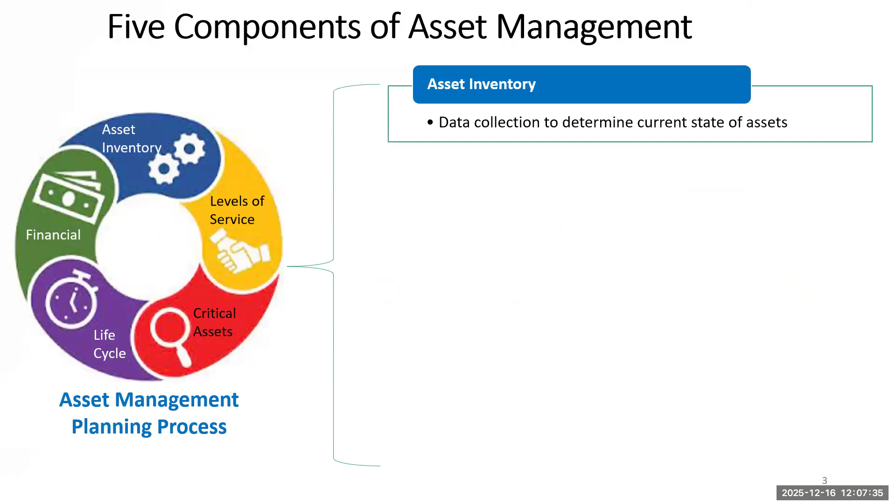We looked at the asset inventory, which is a framework to collect data. We talked about asset criticality as a way to analyze risk and prioritize asset actions.

We explored the asset life cycle, and we did an example where we compared an asset where we did all of the required maintenance that would be expected over an asset's life cycle and compared that to not doing the maintenance. We found out that it actually increased the annualized cost.

We talked about levels of service, and we had an example where we looked at a lift station where it was expected to deliver a certain flow and PSI, and we can use that to compare the performance of the asset over time. We also briefly discussed long-term financial planning, which we're planning to be able to cover the cost of future projects.

We talked about criticality: higher criticality assets require some type of immediate work, whether it be rehabilitating, repairing, or replacing, whereas low criticality assets might only require routine maintenance. Those assets in between, like something with a high probability of failure but a low consequence, or a high consequence but low probability, might just require aggressive monitoring or inspection.

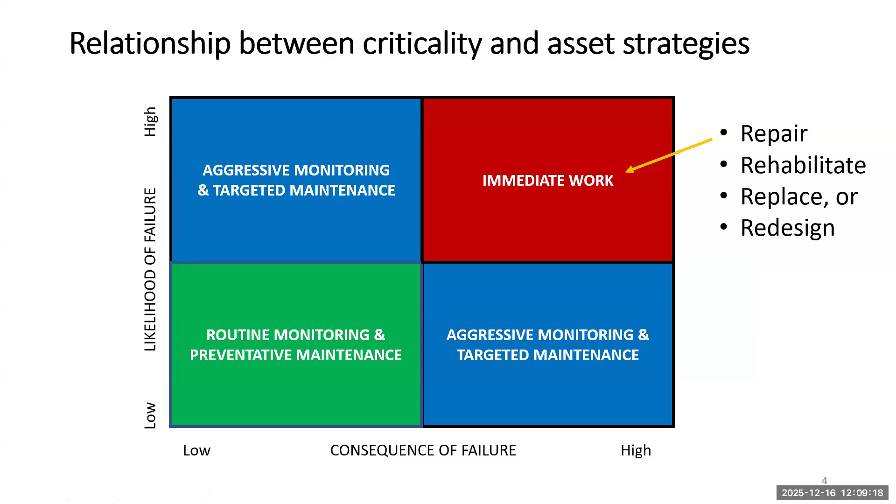We also looked at asset performance over time. We looked at the decay curve, for example, and noticed that over an asset's performance over time, we get to a point where it has an accelerated rate of decrease in performance, and we want to be able to catch failure modes before they result in outages or further damage.

We're going to get into this a little bit more today as we discuss lift stations. We've found that certain techniques like ultrasound or vibration analysis can help us detect certain types of failures and replace, for example, a small bearing, or adjust the amperage imbalance so we can prevent greater amounts of damage over time.

So we talked about this decay curve and briefly touched on some of the inspection techniques that we'll get into more today. Then near the end of yesterday's training, we talked about basically 4 different categories of assessing the condition of collection mains.

We looked at inflow and infiltration. We spent quite a bit of time on that, differentiating between what is inflow and infiltration, and how to interpret that. We used the concept of gallons per day per inch diameter mile.

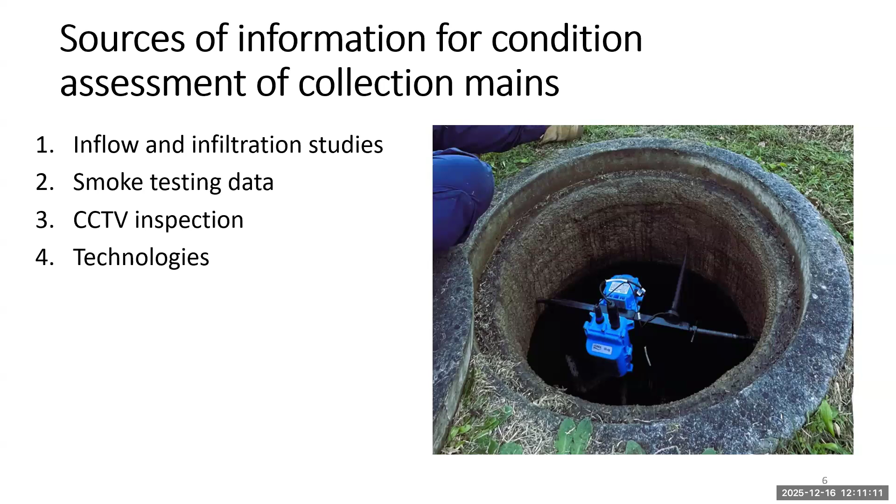We talked about smoke testing, CCTV inspection, and interpreting and coding those results. We talked about a couple different technologies: electrical scanning and the sewer line rapid assessment tool. We used that information to prioritize areas of our collection system that we're going to focus on repairing, inspecting, analyzing, or rehabbing. So that kind of sets the stage for today.

As Ingrid said, we want you to be able to interact with us, even though we're separated by this Zoom media—you're on one side of the screen, I'm on the other, we can't see each other. But if you can engage in the chat, if an idea comes up, share it. If a question comes up, share it in the chat, and it'll be recorded so we can bring it up during a Q&A session.

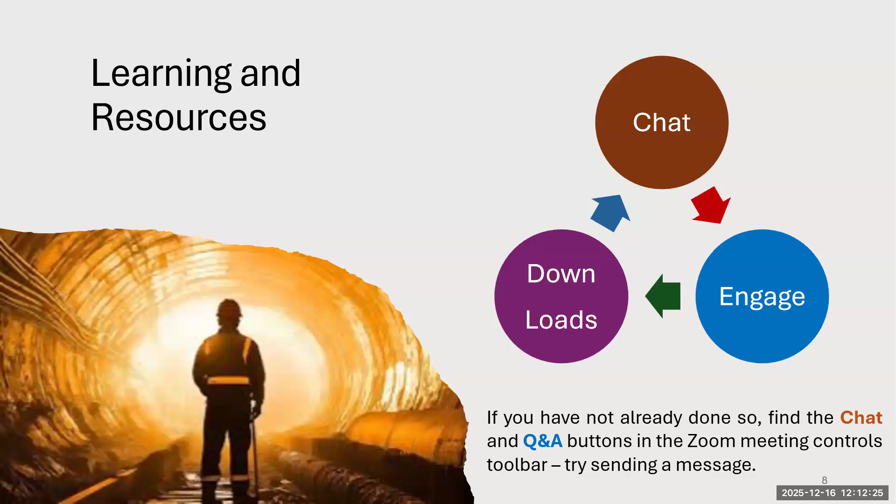Remember the downloads. There's a resource page with documents you'll want in your library: actual manuals, studies, and blogs—quite a few resources you can engage with. By sharing ideas in the chat, you help other learners too, since there might be questions on your mind that other learners share. So be sure to take advantage of that.

Today, we're going to be looking at the following topics. We're going to start out by thinking of some ways that we can refine the criticality of certain assets.

Some ideas that will help us decide which collection main, for example, is the highest priority. Then we're going to look at some repair and replacement options for collection mains, and spend some time on the condition assessment of lift stations. As we end today, we'll look at maintenance strategies and how to analyze them, and finally end up with some financial and strategic planning concepts.

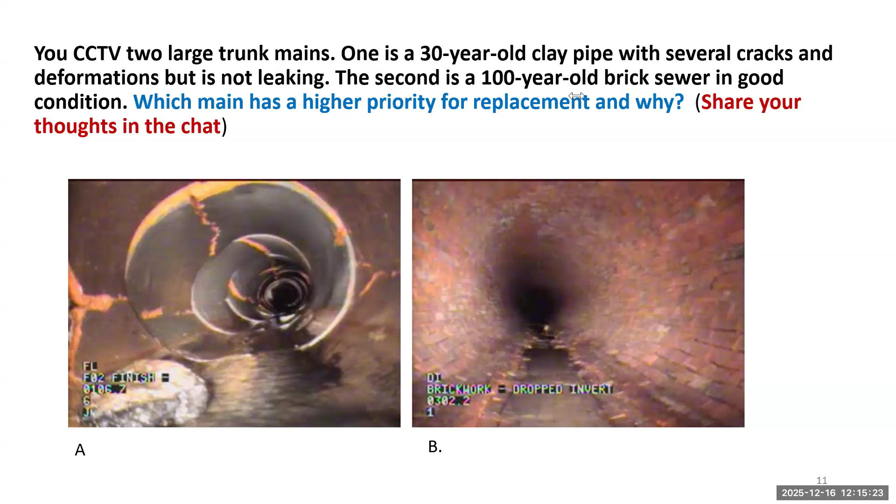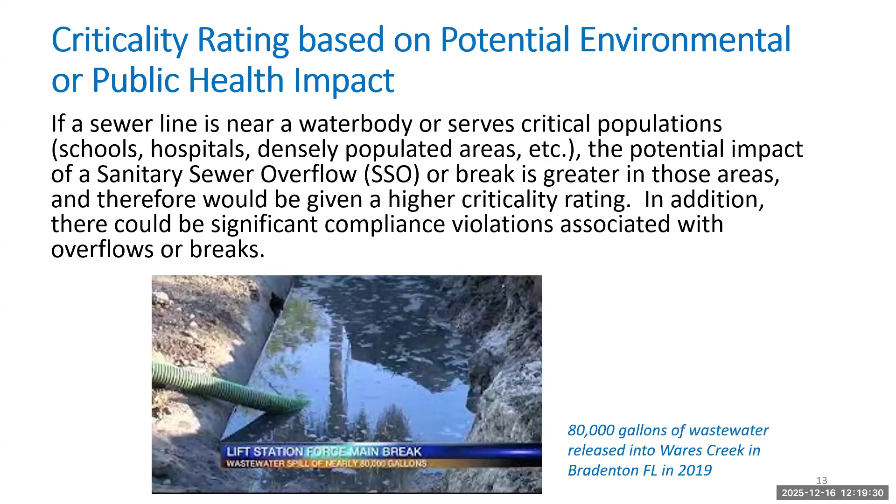But if a wastewater main is difficult to get to and you have an emergency breakout, that's a higher criticality, and you'd want to catch that before it happens. These types of situations aren't only difficult, they're unsafe for operators, and can cause longer disruptions and result in much higher cost.

I've heard some figures, and I've tried to track them down to find studies to validate these, but as a general rule of thumb, emergency repairs can cost as much as 7 times higher than a planned repair. It kind of makes sense, because you're rushing around to get materials and you're not able to take advantage of cost savings—you just need what you need when you need it.

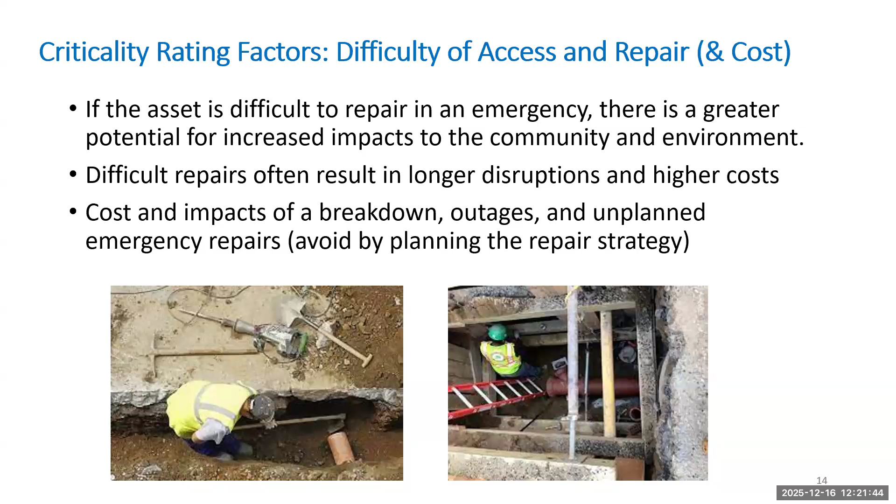For a repair, you might need some kind of dewatering pump, traffic barriers, safety equipment, and you need all the repair materials on hand. So the economic impact for sure is greater, and a disruption such as an emergency with an unplanned break can result in some serious time problems as well.

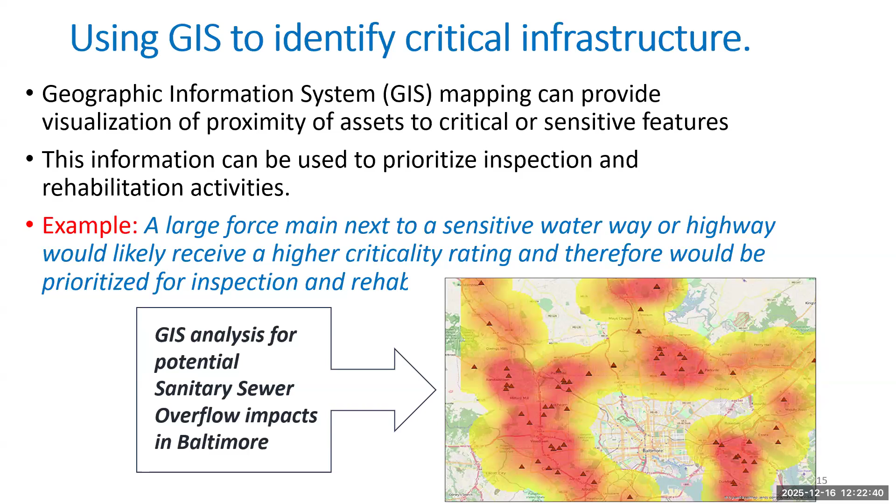I'll give you an example here of criticality—we looked at this yesterday. The criticality factors we just looked at would mostly affect the consequence of failure. We have two examples: a collection main that's 1,000 foot, 24-inch diameter clay sewer, and a 100-year-old 18-inch concrete main.

For the clay main, the probability of failure is 2—it's not likely to fail anytime soon. The consequence, however, is 4—it would cause a major impact, probably partly because we analyzed how it might affect environmental conditions or public health, transportation routes, and population centers. So it would have a 4.

And this number 2 here, we have a 2,000 foot, 100-year-old main. It's still in relatively good condition for its age—probability of failure is a 3—but it could have a catastrophic consequence, most likely with some extra weighting due to some of those factors we looked at.

If we compare the two—and I'm sorry, I have lift stations there too—one lift station has 20 years remaining, and the other only has 5 years remaining. If we take the criticality for each of these: collection main number 1 is 2 times 4, which gives us an 8. Collection main 2 has a probability of 3 and a consequence of 5, giving us a 15.

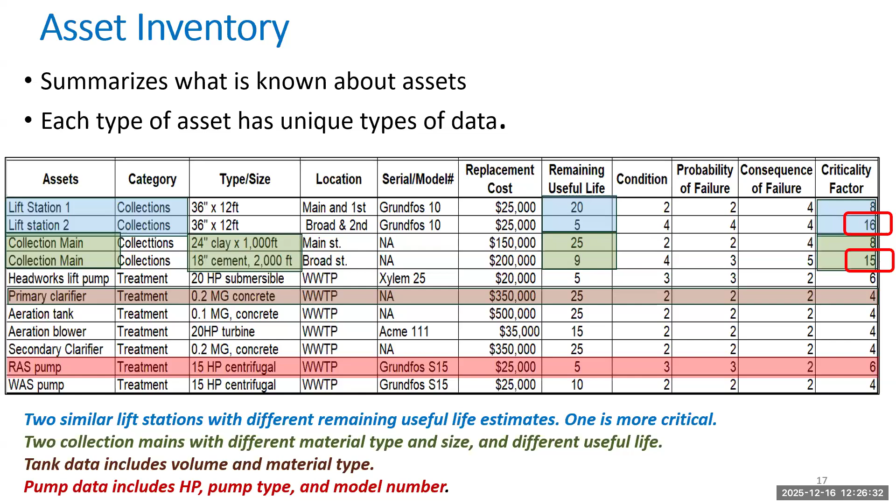If we look at an asset inventory, some of these things are reflected here. Here's our lift station number 2, you see it has a 16, and our collection main number 2 has a 15. I've circled those under the criticality factor, so we can make a financial plan to address those. The higher criticality ones would go into our capital improvement plan. If we have a 5-year or 10-year capital improvement plan, those would be represented.

Now we want to talk a little bit about ways that we can rehabilitate collection mains. There are three general ways I want to talk about. The first is slip lining.

Cured in place pipe is a way of inserting a lining into an existing pipe. This seems to be the preferred method for a lot of pipe rehabilitation. It does not affect the interior diameter as much as slip lining. It's essentially just renewing your pipe, and it has a 50-year life expectancy. You pull in a liner that is impregnated with a curing chemical that will cure into a hard pipe. The disadvantages of cured in place pipe, CIPP, is if you have a situation that doesn't allow the liner to be pulled in effectively, like a collapsed pipe.

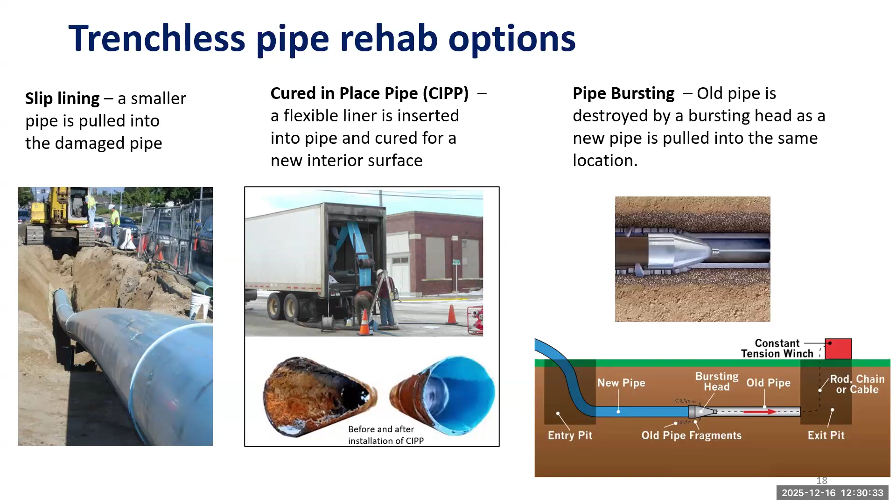So we'll look a little bit more at cured in place pipe. You have a pipe that's damaged, it has cracks, but the pathway is not obstructed. You would clean it and evaluate the pipe to make sure that it fits into the scope of what CIPP can be used for.

Then there would possibly be the need to bypass pump around the repair site. In some cases, and Daryl has had experience with this, your collection system may have enough storage where you can just block off that section that's going to be repaired and allow the upstream piping to basically be like a storage tank for the wastewater as the repair is being conducted. But if not, you would have to have some bypass pumping around the repair site.

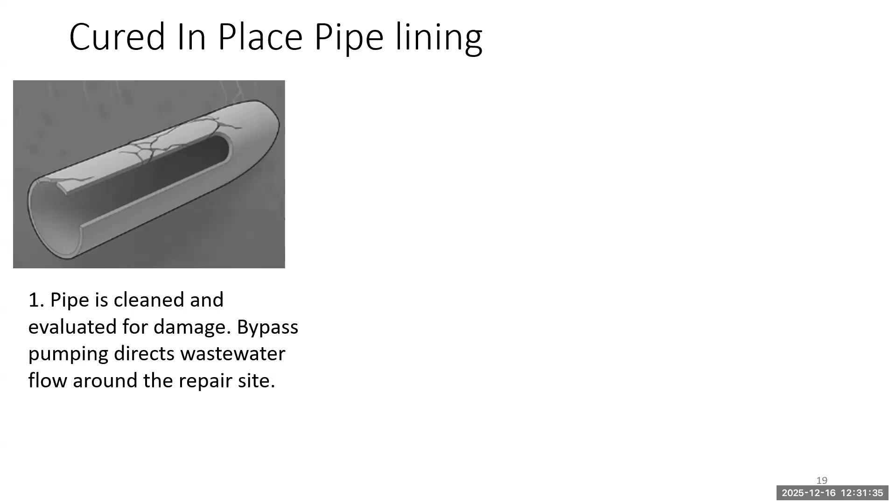The liner is pulled in and inflated, injected with resin. It's inserted into the pipe and then inflated in some way so that it expands out to the pipe diameter, and then it's cured.

There are different ways that people use to cure it. It can be with heated steam, but there are other methods that can be used. It could even just naturally air dry if you have the right conditions.

After this pipe is inserted, it's blocking off all of the interconnections, such as service connections coming from homes. So a robotic tool is used to go through and restore all those service connections.

I read about some other problems that can occur with CIPP pipe, and that includes connections in manholes can end up leaking, and so sometimes you have to go back and grout those interconnections in manholes because that's where the pipe terminates. So sometimes you might have to do some grouting around those terminal ends.

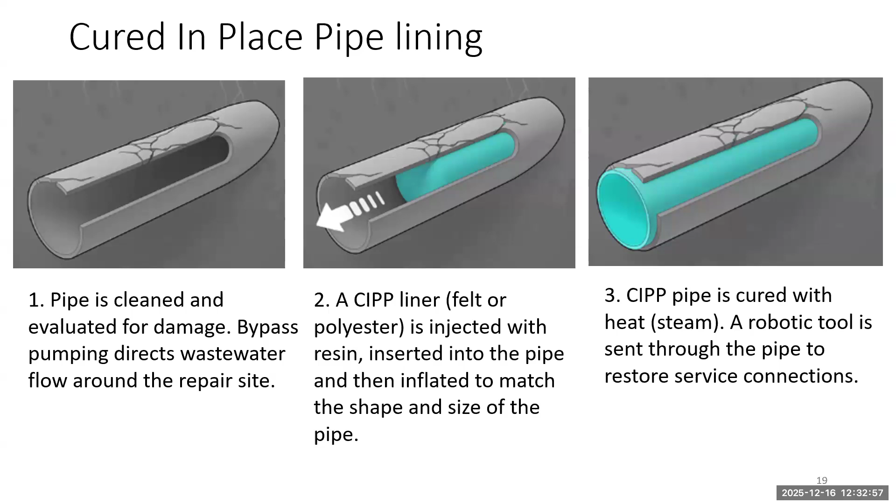Here's a little diagram that shows the CIPP being essentially inflated with either steam or water, and then it's cured with either steam, in some cases ultraviolet light, or just natural air.

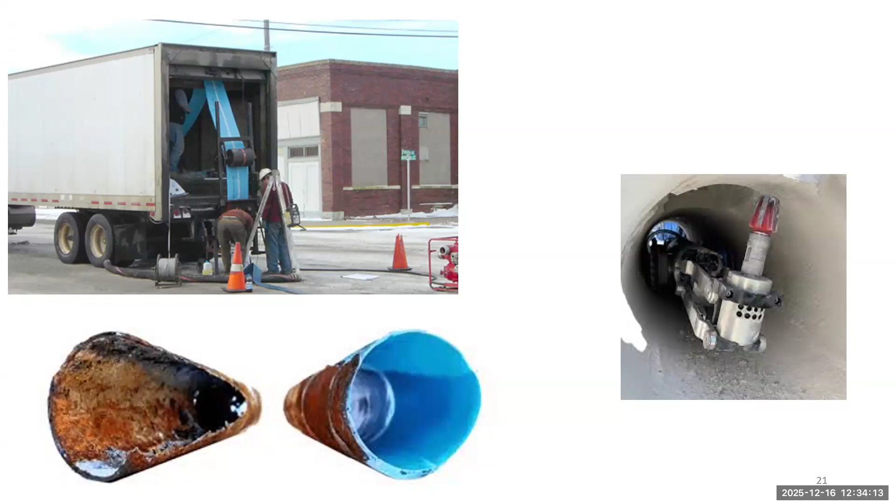On the bottom left of your screen, you can see the before and after picture of a CIPP project. That left pipe is pretty much gone. That section of the collection main was basically the ground around the pipe, and you can see in the after picture that pipe has been restored. On the right of your screen, you can see that little robotic tool that goes through and reestablishes the connections.

Let me move something here. So you can essentially isolate the area.

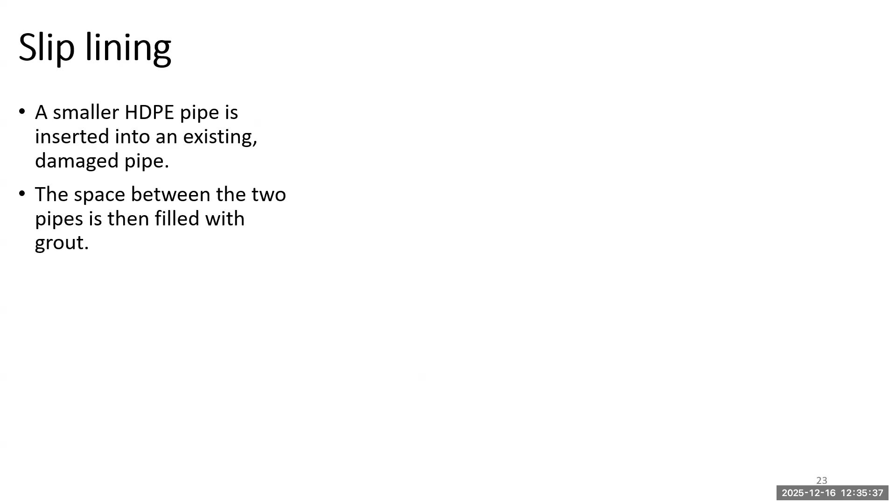We'll look at slip lining a little bit more. When you conduct slip lining, you're basically pulling a smaller HDPE pipe - a plastic flexible pipe - into the damaged pipe. Now, to complete the process, there's likely a little gap between the new HDPE pipe and the older pipe, and this is filled with grout.

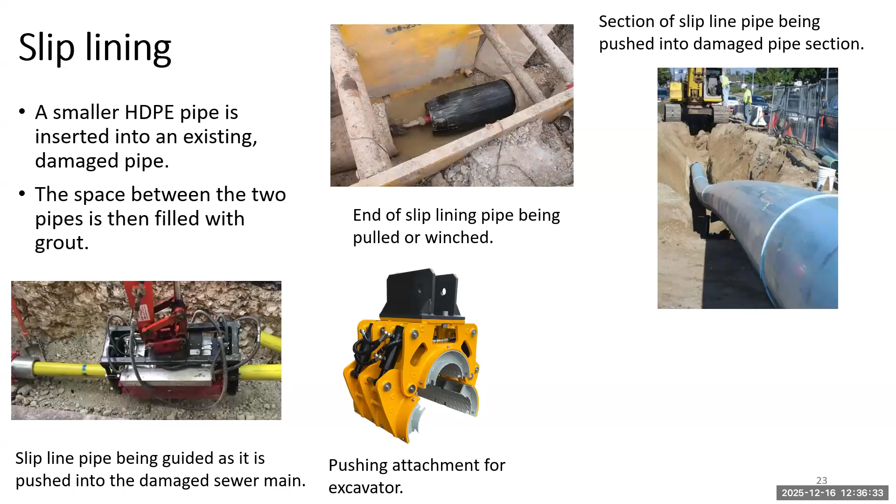Here's a little pushing device that could be added to like a backhoe or something that can allow you to grab on and manipulate the pipe, push it in, or insert it without damaging the pipe. Here's another image of a pipe being inserted into an older pipe. And at the end, an attachment is added, and grout is placed around that slip line pipe to seal it.

So those are the processes. This slip lining, as you can see, you lose some capacity of your main, but it's pretty straightforward. If you pull it in, you don't have to spend any time curing like you do with CIPP, but you do lose some diameter.

Pipe bursting - here we have a little diagram. You can see the bursting head coming in. It's destroying that old pipe and pulling in a new pipe.

Here's an example of what a bursting head might look like, and there's going to be some kind of a winch that is putting constant tension, and you can see that little hole at the end of that bursting head. That's where the winch would be connected.

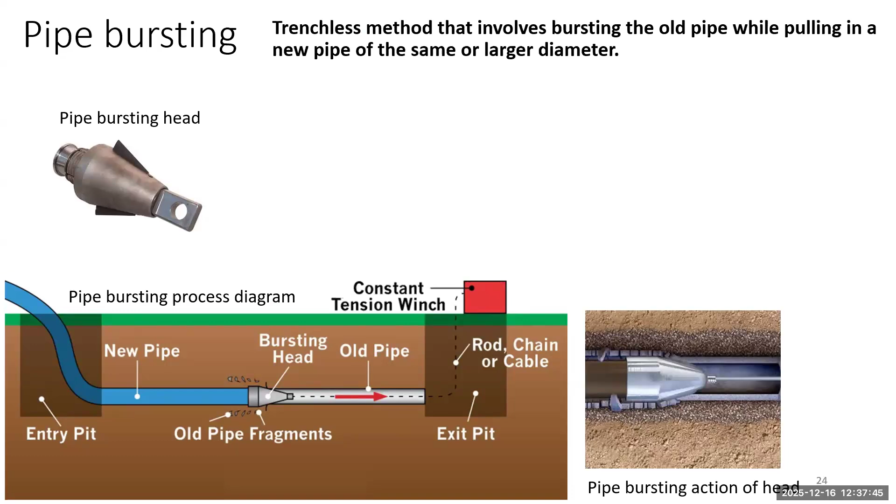And you can see a little bit - I showed this image before - but kind of a close-up diagram of how the bursting head would move that old pipe, destroy it, and move it out of the way.

Here's an actual image of a pretty large pipe being pulled in. You can see the winch pulling that in, and it looks like the construction crew is there, and they're going to be disconnecting that as the journey of that bursting head is coming to an end in that location.

These are trenchless technologies that we just looked at. However, as you can see, some excavation did have to occur to retrieve the bursting head, and some basically potholing at the initial location where you start and the terminal location where you end.

The other option, if you're not using trenchless technologies, is open trench construction. This is the most costly and most time consuming. You have trenches, and you have to use shoring to protect operators if the trench is in an unstable area or if it's over 5 feet, and you're disrupting roadways and so forth. Sometimes it's the only option.

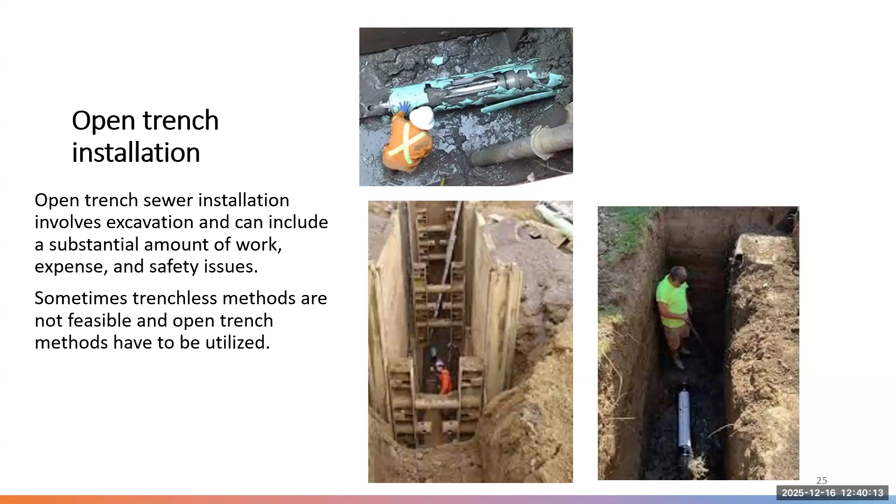And of course, slip lining might not be an option because you can't afford to have the pipe be smaller. You need the full capacity of the pipe.

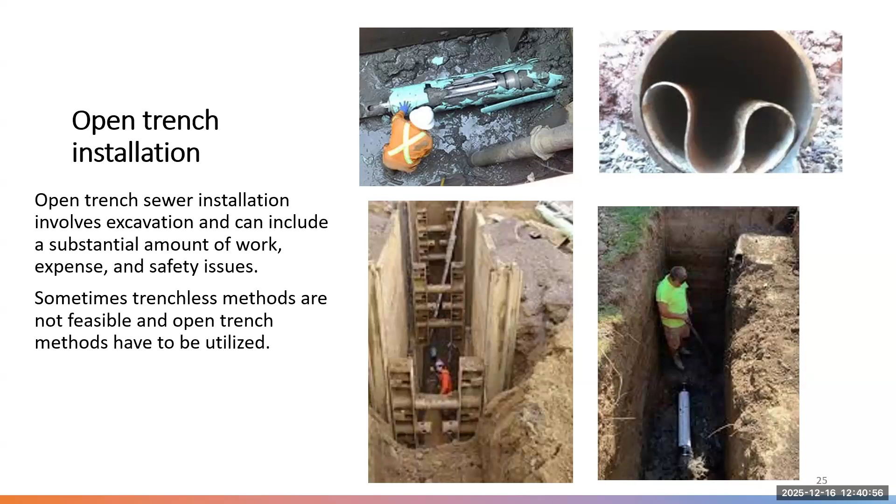Now we're going to go to our first poll. The poll is: you have a trunk main, and it's already at the minimum diameter required, and it has a lot of leaks and cracks. It passes under a highway and along a river. So what method do you recommend? I'm not saying there's any one right answer—this is for you to think about what method you would use. While you're doing that, I'm going to be looking at the comments to see if there's any questions or thoughts you've shared.

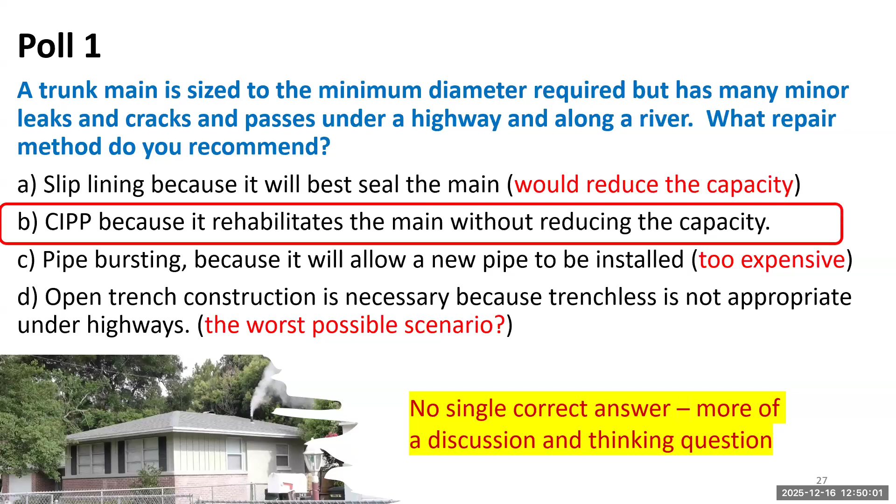All right, I'm going to keep track—I have the clock here on my phone so I make sure we're staying on track. And I chose B, but there's no one correct answer for that. Thank you for the discussion.

We're going to move on to talking about lift stations here, and specifically we're going to think about what are the components of lift stations, why are they there, what happens if they go out, and more specifically, what are some ways we can use to assess the condition of lift stations?

We talked about this a little bit yesterday when Daryl was talking about failure mode effects analysis, and we looked at all the different components in a lift station that have to work—there were quite a few: the power coming in, the control panel, the level control system. In this image, the level control system is floats, and we have a pump and a motor. In this case, it's a submersible pump where the pump and motor are one. We have a force main, and that force main has check valves on it so the water we just pumped to the higher gravity sewer doesn't flow back into the wet well as soon as we pumped it. So we want to consider some of these things.

If a lift station were to quit working, it can result in sanitary sewer overflows—you might say it's almost like a bridge. It's an intersection point in the collection system where you're conveying wastewater from a lower portion back to a higher portion so it can continue flowing by gravity in most cases. Those are the ones situated out in the collection system, and of course you have different variations. There are lift stations at the headworks, for example, because by the time you get to the treatment plant you're usually pretty low, since collection mains have a slope—maybe only 0.5% or 1%, but over a long distance, if you have a fairly flat area, your collection pipes are going to get deeper and deeper and deeper.

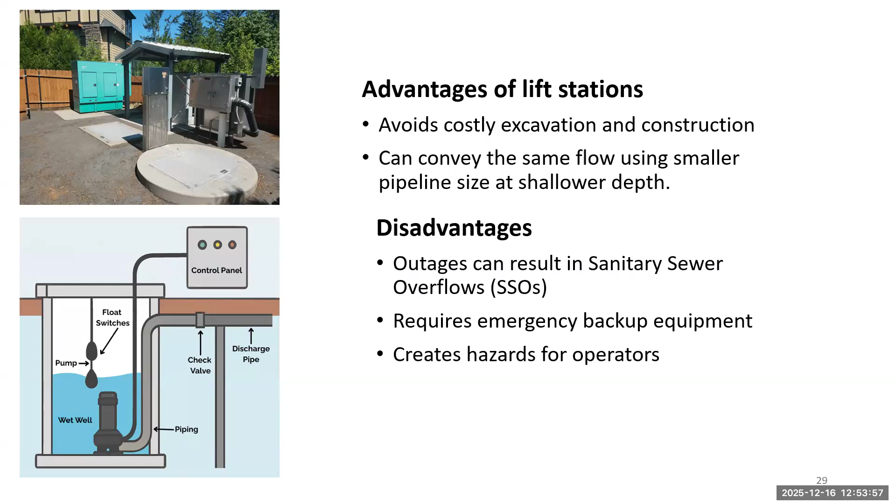In our collection system, lift stations will typically have two pumps, and they call this a duplex pump installation. This gives us two things: first, it gives us some redundancy - if one pump goes out, at least you have one pump still working. But one of the main reasons is so we have a wide range of flows.

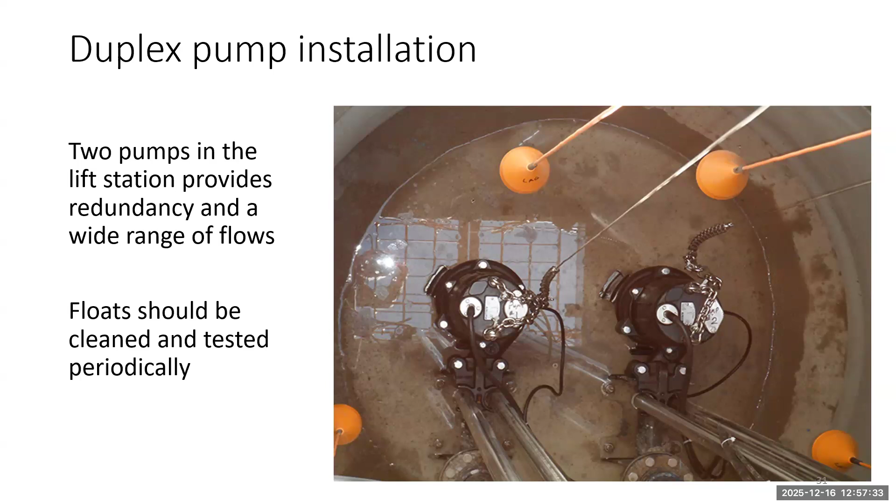These floats can become coated with grease and fats, kind of like a fatberg developing on the float, causing them to be heavy and not lift properly. So periodically they need to be cleaned - you can take a rod and lift these up to make sure they work. You can do some testing every so often to make sure they're operating the appropriate functions: the lead should turn on the lead pump, the lag should turn on the lag pump, and the high level should operate the high level warning, whether it's a light on top of the lift station panel or an auto dialer, whatever the alarm system is.

The wet well is normally sized to have a 20 to 30 minute detention area time, and that can be partially reduced if you have a VFD. A VFD allows you to handle a higher range of flows.

You're trying to minimize pump cycling. When engineers design a wet well, they'll say we don't want these pumps turning on more than 6 to 10 times per hour, for example. That would be the upper level of cycling. You don't want your pump turning on every 30 seconds, because it's hard on the pump. It uses too much energy, it's not efficient, and it will reduce the pump's life. So you want it to be sized appropriately.

Some of the things that can disrupt that is if you start having a lot of I&I, inflow and infiltration, that adds a lot of extra water to these lift pumps that were designed for a certain flow. Then all of a sudden your cycling increases, and it results in additional wear.

There's a concept of the active volume in the lift station wet well. This is the difference between the lowest level that's expected to be, where it gives you room for cooling the pump, and the upper level. That would be where both lead and lag pumps come on. And then you have some extra range in that high level that gives you a little bit of time if there is an outage. So that area above the active volume before it actually overflows, that's your time to take some kind of action.

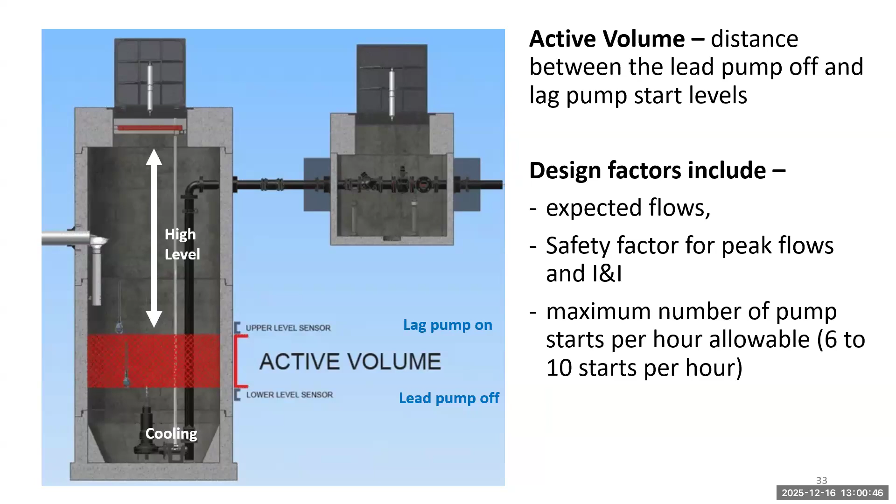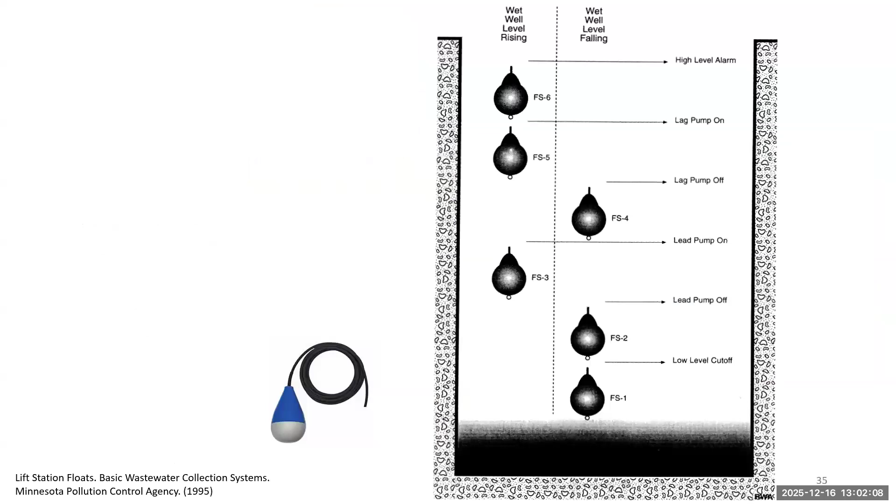And how you would set these, you would have a little distance. For example, the high level alarm might be 6 inches above the lag pump on here, so that both pumps come on and they can't keep up. You want to know that right away - hey, we're not able to keep up with this, something's wrong. The lag pump on might be something like 12 inches above the lead pump on. The lead pump comes on, it can't keep up, it needs some help, and then the lag pump comes on.

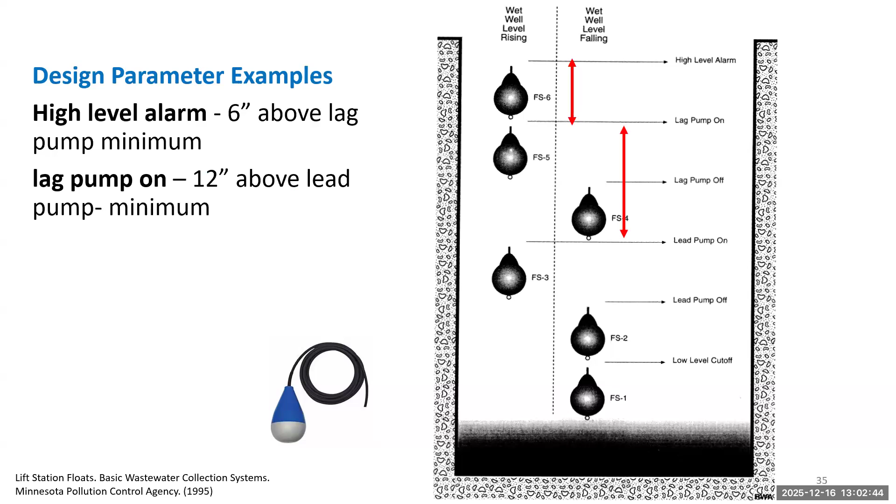These are just some ideas about what you could do. The lead pump on and off is set to handle normal flows, at a distance that would allow it to pump enough so that it doesn't have to start more than the maximum cycling rate. Sorry, I went a little bit too fast on that.

So the distance between lead pump on and lead pump off is the distance you want to pay close attention to, so that under normal operation you have the minimum cycling rate.

There are different ways to control the levels in the tank, in other words, when do the pumps come on and off. Besides floats - floats are good because they don't require an external power source to run them. I mean, they still need power at the panel, but the float itself just operates by gravity. So when the water level goes up, the float tilts and makes an electrical connection, but it doesn't actually have power to it.

But some of these other types of devices actually do require a SCADA type system and power to it. One is a pressure transducer.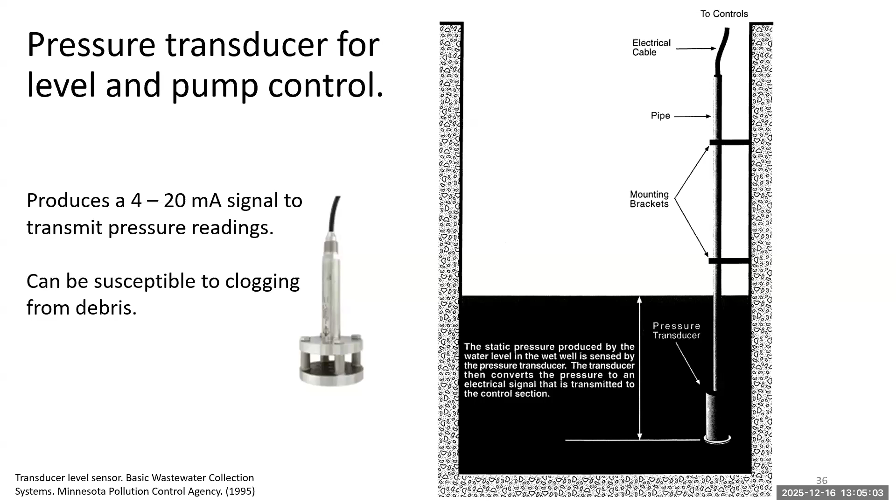So that's going to transmit those readings to the control panel, and it's going to decide what pumps need to come on or off, and if there are high or low warnings that need to come on. Those can get clogged - you have to check them once in a while.

This works on the basis of time of travel. The time it takes for the sound waves to go to the surface of the water and back is the time, and it converts that into a distance.

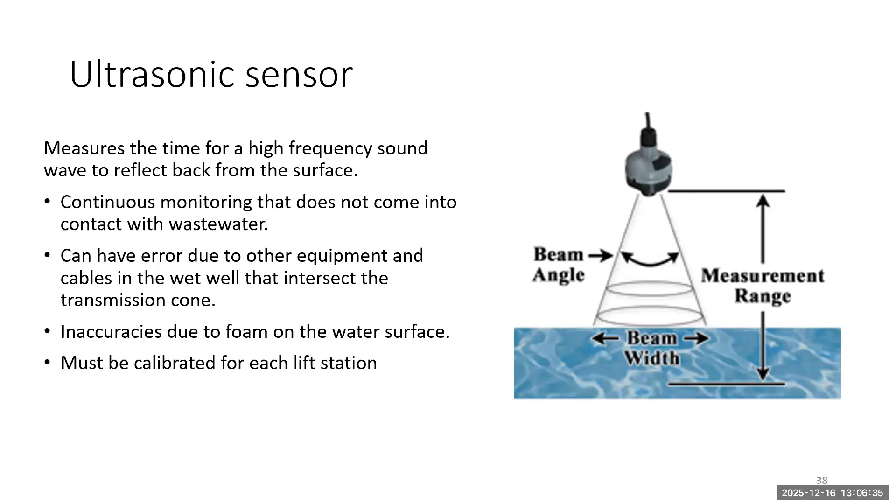You can see a little image here - the beam goes out and reflects back. If you have equipment interfering with the cone, it can affect it. It can also be affected by foam on top of the water, so it has to be calibrated to make sure it's giving an accurate measurement. But as long as it's calibrated, and you don't have excessive foam issues or anything intersecting the path, it's a very accurate method.

There also can be radar sensors. It's sending an electromagnetic pulse instead of sound waves, but it works on the same concept. One advantage of the radar sensor is it's not affected by foaming - it's going to reflect off the water surface even if there's foam on top. It can, however, be affected by any source of electromagnetic radiation, such as if you had a VFD controller close enough to it, which could potentially affect the accuracy.

In a panel here we have circuit breakers and things like motor savers, the actual leads coming in for the pump, the power coming in and the power to each pump lead. But one of the most important things is the relays. The relays are the connections to the floats, the float controls, for example, and they're responsible for sending the signal to turn the pump on or off, sending signals to the motor starter to engage the pump.

There's also the alternator that's going to alternate between the lead and lag pump, and there are alarm systems and electrical connections. On this particular panel, you can see at the top some little lights - that's to let you know if the pump is having an alarm condition. And on the upper right, there's actually a transmitter with an antenna that will transmit so you could log in with a SCADA, or get a notification if there's a problem with the pump.

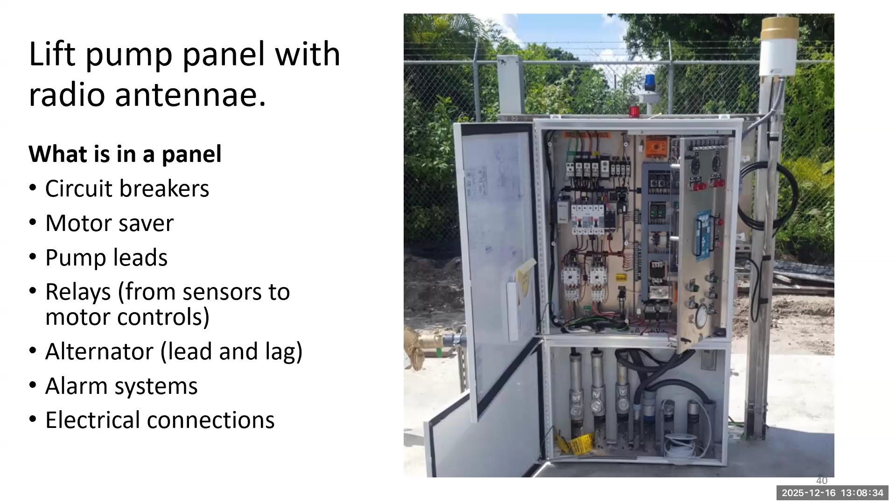So our question is, what could happen if the float control system malfunctioned in a lift station?

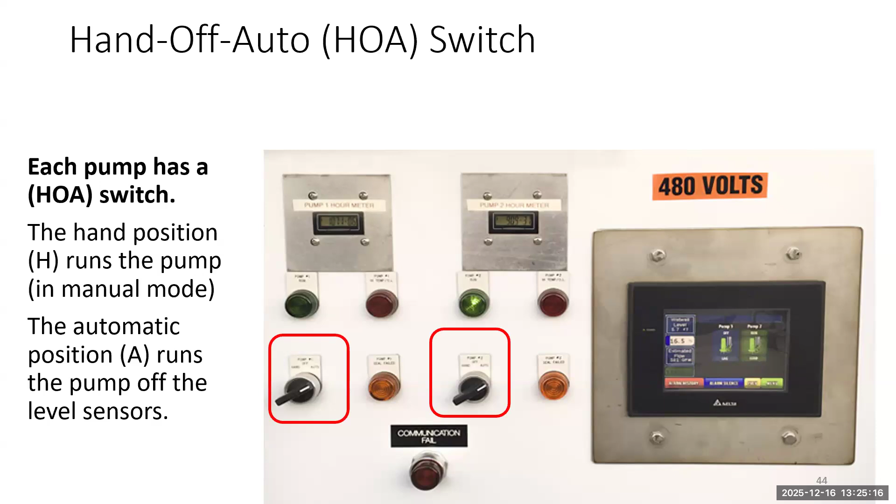There's a little close-up picture of what a hand-off-auto (HOA) switch might look like. And here's a drawdown test, which is a way to check the flow rate.

We were just at a utility, and we were looking at their lift station, and they had a magnetic meter, a mag meter that would record the flow rate and the amount of flow going out of the lift station. But they also would do a drawdown test periodically just to check the meter and make sure it was accurate.

But if you didn't have a meter, this would be your way to check the flow rate being produced by each pump. Over time, the pumps could wear out, or there could be some kind of problem developing, and this is just one more check you can use.

So you basically know the size, the diameter of your wet well. Let's say it's 36 inches diameter, and you pump the water down 12 inches. You should be able to use the volume formula to calculate how much water was actually pumped over a certain period of time. Let's say we pump it down a certain distance, or pump for 1 minute, 60 seconds, and then look how much is pumped and divide it by the time, and you get your actual gallons per minute of flow being pumped by that lift pump.

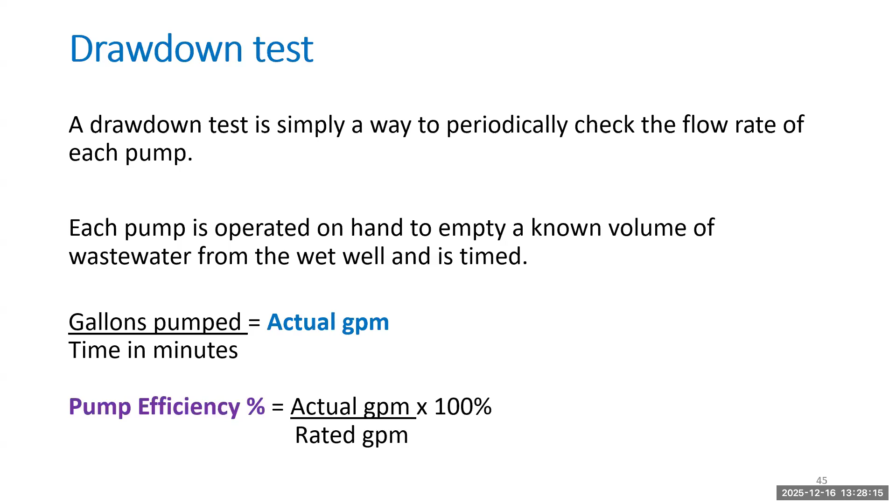So you could take the actual pump - let's say we installed it 10 years ago, and when it was brand new, it would pump 150 gallons a minute. Now when we check it, it's pumping 123 gallons a minute. We could see how much difference there is, what percent difference, and then investigate why. Is it because the motor's wearing out? Does the impeller need to be adjusted? Is there something clogged? Is the force main becoming clogged?

When you go out to a lift station, there are certain things you could record if you have access to them - for example, the number of pump cycles per hour, how long each pump is actually running, the wet well level, whether it's running or not, whether there have been any alarms, and what the total flow is that it's been pumping. Those are all good pieces of data to record when you go out to check on a lift station.

If you have increased run time - I mentioned this before - there is a check valve on the force main, and it allows water to only flow in one direction, from the pumps out to the force main. We don't want that water flowing back. If it tries to flow back from the higher collection system through the force main and into the wet well, you'd be double pumping that water. So if a check valve becomes partially stuck open because of grease and debris, water flows back in, and that could be one of the reasons you have increased runtime - because you're not only pumping the new water, but also a portion of the water you just pumped.

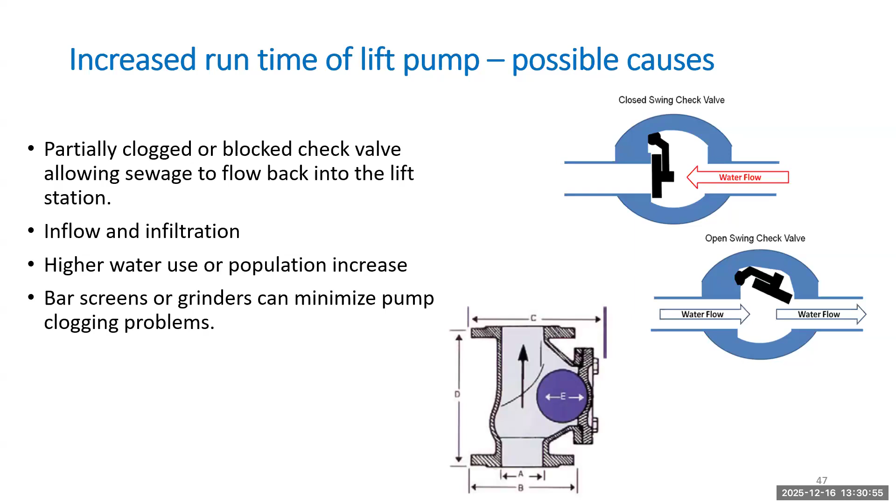There are certain things we can do. We can add screens to keep things like rags out, or grinder pumps to keep large solids or fatbergs out. Normally a lift pump, a submersible lift pump, is designed to pass a certain size of solids, typically at least 2.5 inches.

Rags can really wreak havoc on pumps. They can tangle up. Flushable wipes are not really flushable, and things like rags, and people even sometimes flush diapers down the toilet, and those can really wreak havoc. They're not biodegradable, and they can end up causing clogs. So you want to screen those rags, and there are certain types of cutter pumps that can help solve some of those problems.

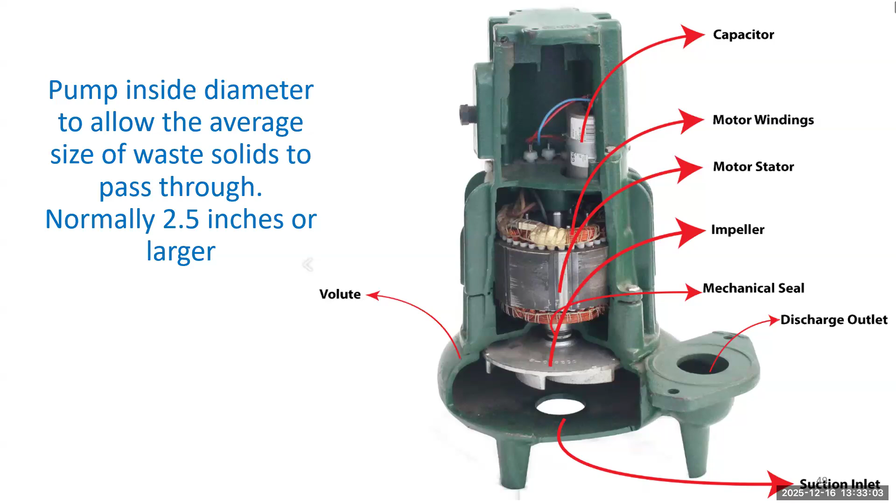That's one of the reasons why we want to maintain a certain level of wastewater in the wet well, so this pump can be cooled. It's sealed, and you want it sealed from water coming in and destroying the electrical components, but you also want water around it so it can be cooled. Certain submersibles are dry run submersibles, where a special jacket circulates water, so you can actually run them in a dry situation. Those are a little more expensive. Sometimes they'll be in pump stations intended to run dry, but they could also survive a flood, operating out of the water or in the water.

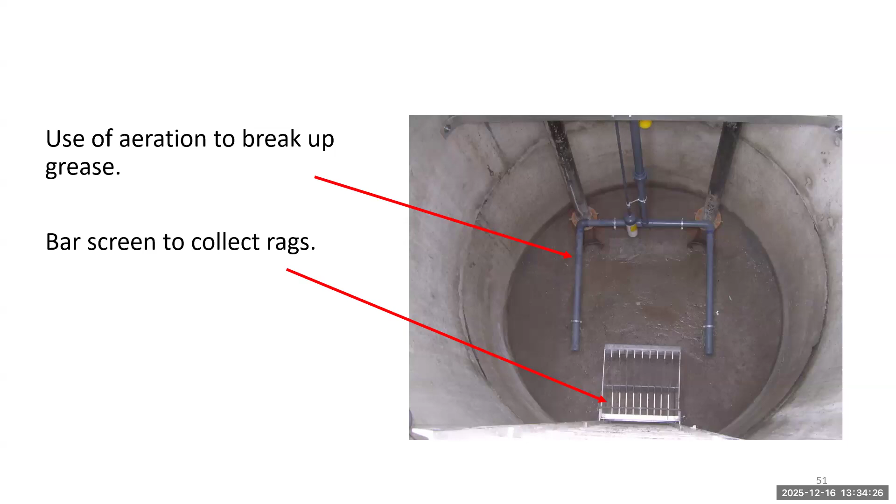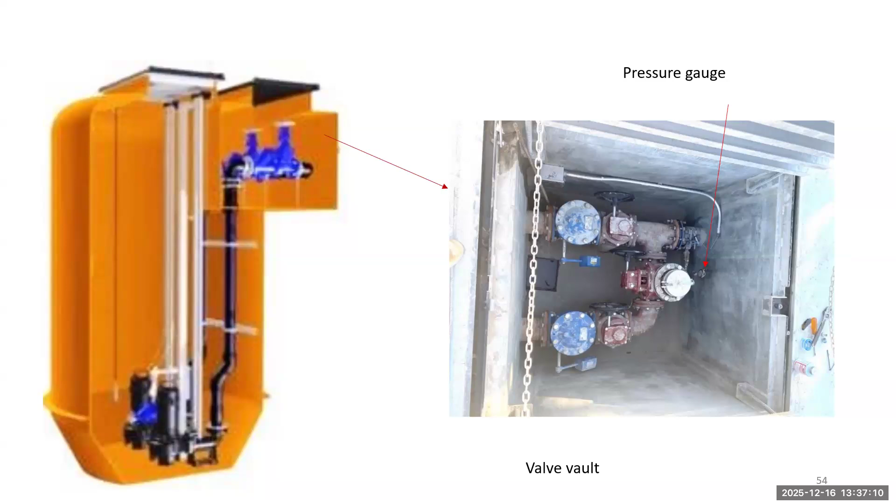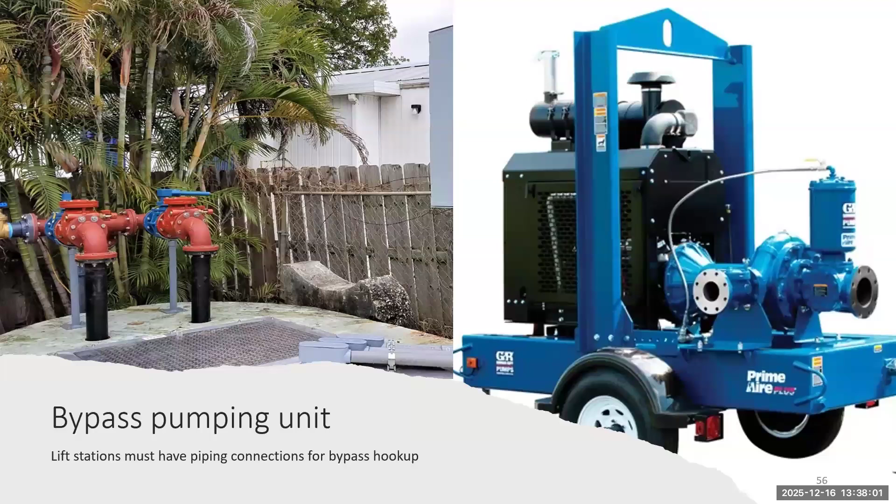You could also have some kind of bypass pumping unit. This is a mobile unit where operators can move it around. If you just had a few lift stations and had time, with large enough wet wells, you could go around and just pump them down. There's a system not too far from us that does this very thing - if they have a power outage lasting a day or so, they'll take their portable pumping unit and hook up to lift stations. You'll notice a couple of pipes extending up from the lift station. In order to use something like this, you'd have to have the piping connections that allow you to hook the pump to the lift station - that would be the only thing. That's another asset expense that would be well worth it so you can use bypass pumping at the particular lift station.

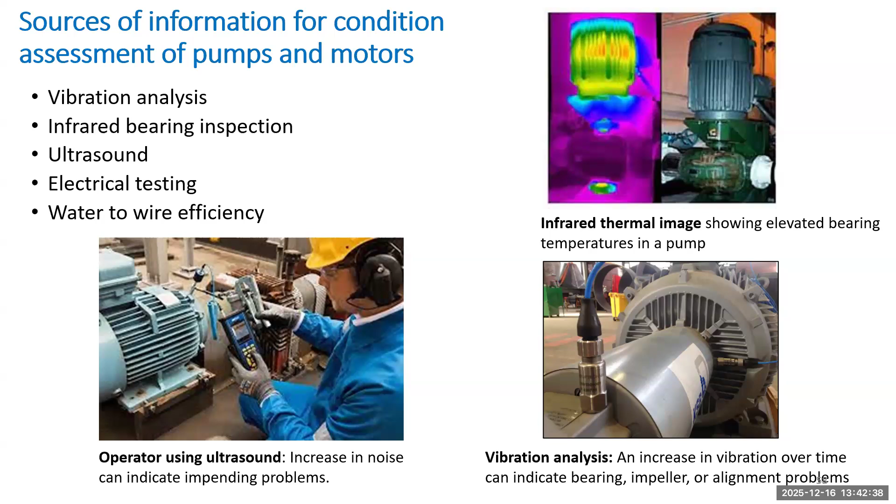You can also use ultrasound actually to lubricate bearings. You can apply just the right amount of lubricant or grease. Say, for example, you have a little grease gun and you're adding grease. You can just apply just enough to take the sound away. So it's pretty amazing technology.

Here's some examples of some infrared images, and you can see that definitely more heat is coming out of the bearing areas. That's the whiter hot, the lighter colors or the hotter points. And this is showing some impending bearing problems.

Vibration analysis here, there's different points that you would measure at. So you're comparing increases in vibration, but very small vibrations, much smaller than you would detect with your senses. It's very, very sensitive, and it will give you an early warning if something is about to fail.

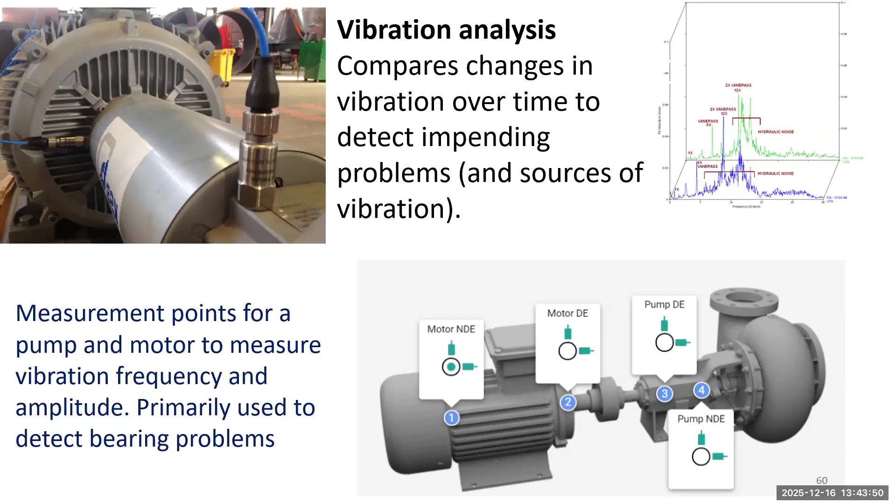Or different things could happen besides just a bearing. You could have a damaged impeller. Maybe there was some water hammer, or maybe there's some cavitation going on. It would sense those. It could be that if you have a coupling, if your motor and pump are separate, connected with a shaft, that it might not have perfect alignment between the motor and the pump, and that could cause problems as well. Vibration analysis can help with that.

In this situation, that alarm level is because we have continuously installed vibration sensors that are always there. But it doesn't have to be continuously installed. It can be like a handheld device that you apply to your mechanical equipment and just test it periodically, maybe once a quarter.

So an increase means that there's something going on. There's a bearing starting to fail. It's not lubricated properly. There's cavitation. There's misalignment. And so if you have a continuously installed system, it would convert the vibration to some kind of a 4 to 20 milliamp signal, and you could monitor it in real time as well as look at trends over time.

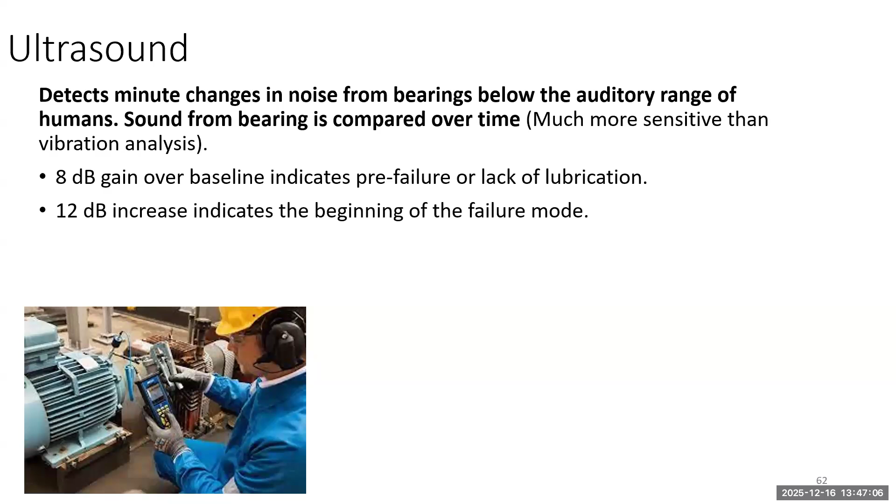Ultrasound: there are some basic decibel levels you can look at. If it increases 8 decibels compared to new, it might indicate pre-failure, or it might not even indicate a failure - it could just mean you need a little lubrication, you need to grease the bearing. A 12 decibel increase means we're right at the beginning of a failure mode, and this is long before we'd sense it any other way. A 16 decibel increase means we're well into a failure condition. And if we get up to 35 to 50 decibels gain compared to new, it means something bad's going to happen - the bearing's going to go out, the pump or motor is going to fail.

So we would monitor that over time.

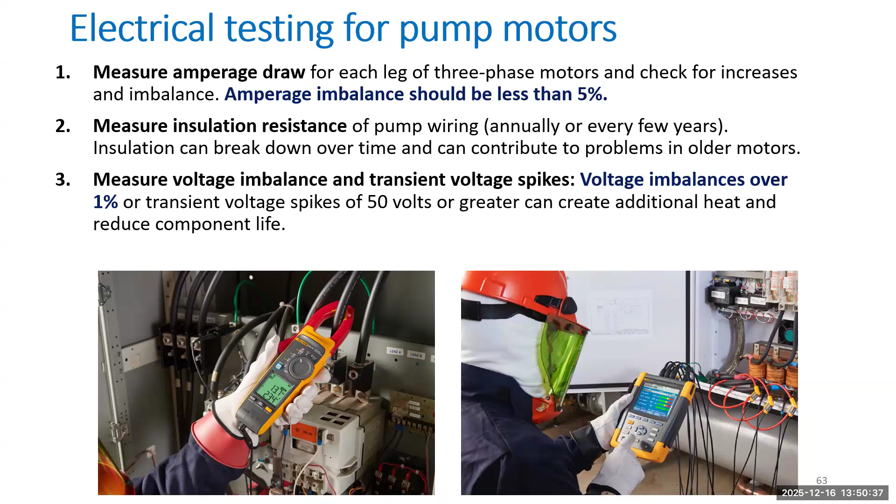So if you're going to calculate the amperage imbalance, here's how you'd do it. In this example, we measured the three legs of amperage draw on the motor: one was 11.1 amps, one was 12 amps, and one was 13.2 amps.

Now notice this is amperage draw, so you're doing this while the pump motor is running, which means you're dealing with high voltage - maybe a 240 volt pump, maybe a 480 volt pump. So it's very dangerous, and whenever you open any kind of panel, there's always the risk of arc flash, which is very dangerous. Notice this operator has gloves, protective equipment, probably a face shield and protective clothing, and is probably standing on an insulated mat to protect themselves.

So you want to make sure you have the right kind of training before you start reaching into a panel. The good thing about this style of amp measurement is you have this clamp, and you don't have to actually touch any actual live wiring. It just wraps around the insulated lead. So that's an advantage, but you have to be very careful.

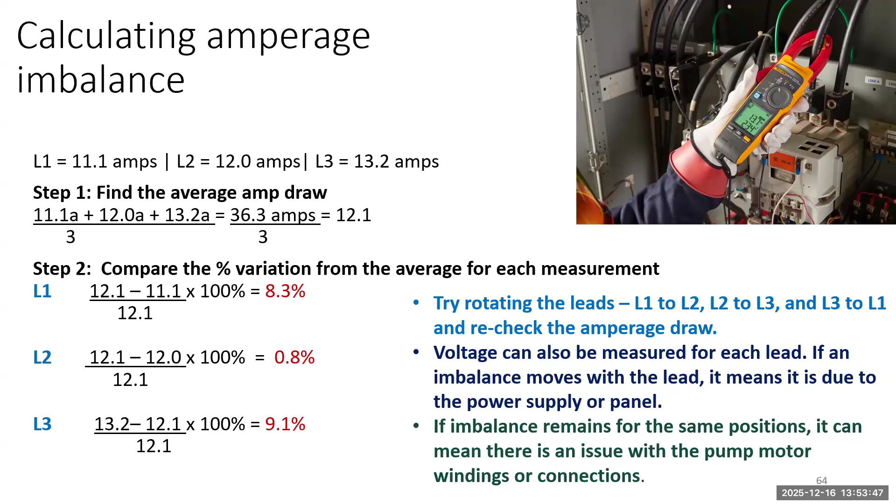The resistance between the motor leads, you can test the resistance between 1 to 3, 2 to 3, and 1 to 2. Basically, you're looking at the path of the current that goes from the lead all the way through the windings to the next winding. The resistance should generally be between about 0.3 to 2 ohms - not very high, but a little bit of ohms. 0 ohms would mean there's no resistance at all. An infinite amount of ohms means it's an open circuit, the wire is broken. So you want a little bit of ohms, but not much, between 0.3 and 2.

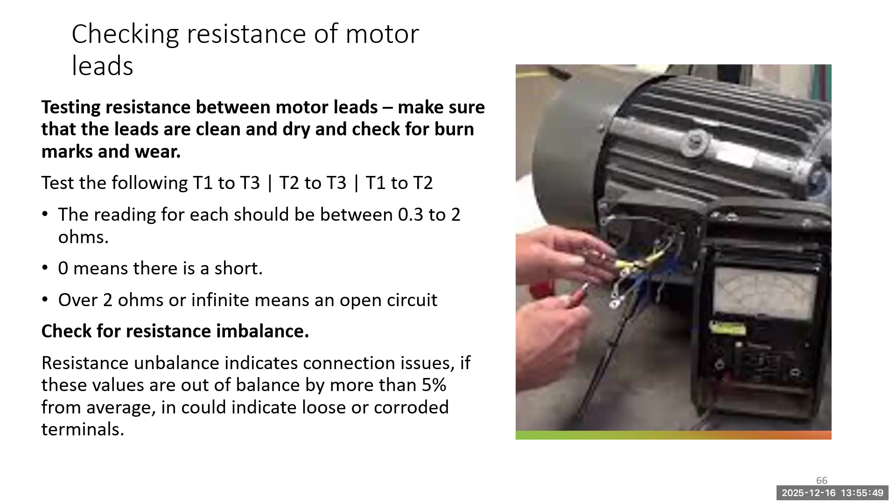You also can perform the same kind of equation like we just did to see if there's any imbalance. You also want the resistance to also be within 5%, so you don't have imbalance.

For electrical power to go all the way through rubber insulation or the insulation that's in the winding, you'd have to have a very high voltage. And that's what they do with the mega ohm tester - it's a high voltage, but low current, trying to get through the insulation.

So basically, if you have a new motor, it's going to be a high mega ohm value. When it wears out, it's going to be less. In general, if you're assessing older motors, it should ideally be at least greater than 10 mega ohms, or 10 million ohms. The minimum, however, that you could still run it would be 1 million ohms, or 1 mega ohm.

Here's the good condition - a motor in good condition that for sure can be reused, greater than 10 mega ohms, 10 million ohms, and the very minimum, 1 mega ohm. If we are below half a mega ohm, or 500,000 ohms, that definitely means we have some damage that we have to attend to. We'd have to consider planning a repair.

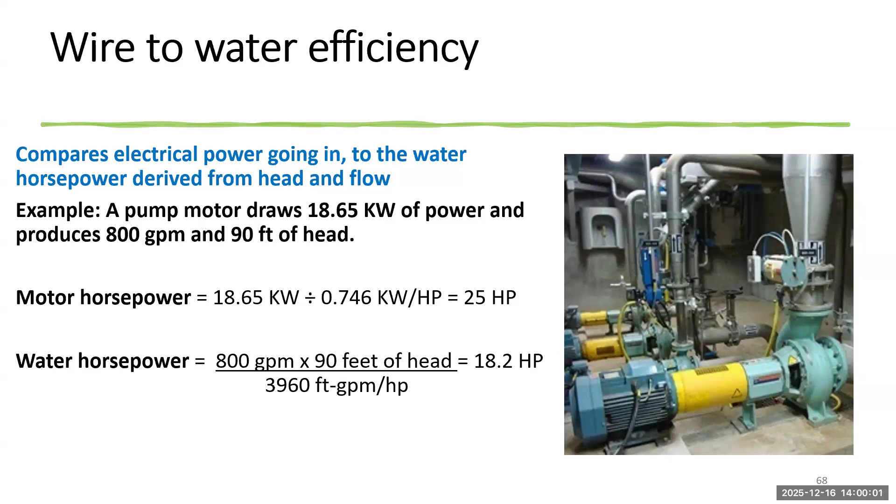So you see we've lost some horsepower there, because there's some turbulence in the pump. There's some electrical energy that's lost through heat. There's some friction in the pipe and in the pump, and so we expect to lose some power.

But we're going to compare these two. We're going to take the 18.2 that's coming out divided by the 25 horsepower going in, and look at the overall efficiency, the wire to water efficiency. This particular pumping system has 72.8% efficiency. Now that might not mean that much just by itself - for all we know, this could be a brand new pump that has a 72.8% efficiency.

The important thing is to compare this over time. You'd like to ideally know the wire to water efficiency when the pump is new, and then be able to compare it over time. Maybe you do this once a year, or every 6 months or every quarter, and you can compare if the pump is losing efficiency. If it is losing efficiency, then you would want to know why.

You could check things like electrical imbalances. You could check the impeller adjustment and things of that nature to see if there are any leaks, and see why we're losing efficiency. You could also use it as a means to compare your service level of the pump, and to know when you need to rehab it or replace it.

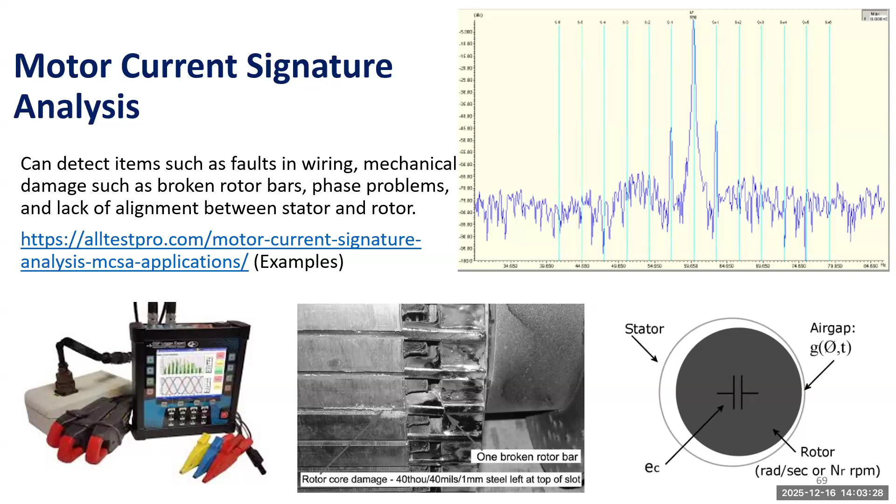It's really kind of interesting. This is kind of like a supplement to condition assessment for pumps. If you have more than one type of information, you could use composite scoring to score the condition of electrical components like this. For example, you might see that you do a mega ohm resistance and you see that insulation resistance has been decreasing over time.

But you look at the history and you see that the pump is operating 8 hours per day, no problem, and it's supplying the head and flow that we need. So the first one shows that we have some decrease in efficiency, but it's functioning well as far as our record of breakdowns, no history of breakdowns.

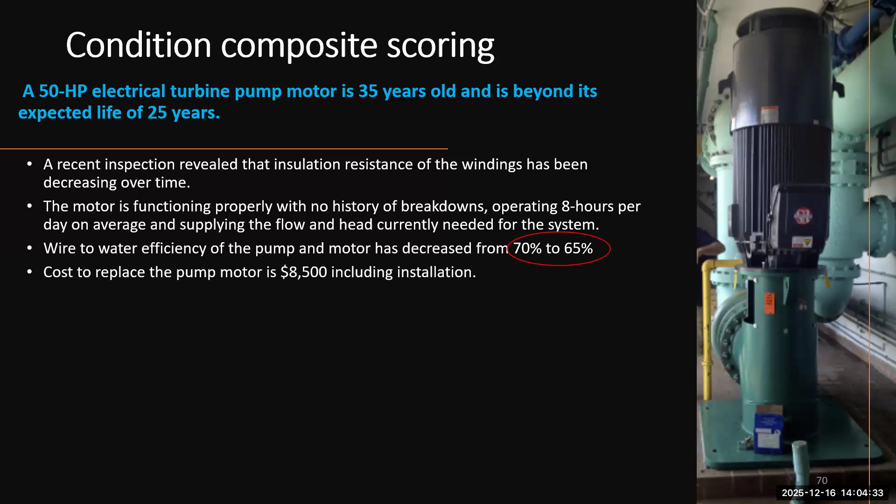We did a wire to water efficiency, and we see that over time we've lost about 5% of the efficiency. It decreased from 70% when it was new to 65% now. We look at the cost to replace the pump motor. It's about 8,500, including the installation.

And so when we analyze it, we could have some kind of composite scoring. We look at the remaining useful life. It's 35 years old, and it was expected to only last 25 years. So we're beyond the expected life. So we could give that probably a poor, number 4 for poor.

The results of the inspection show that we have decreasing insulation resistance and decreasing efficiency. We also give that a poor, 4 for poor. However, the performance history shows no history of breakdowns, so we give it a 2.

How easy or practical is it to maintain? Well, in the old days, with large pumps, we'd probably have it sent off to be rewound. But nowadays, with the speed of manufacturing, it's probably cheaper. It's only $8,500 to purchase it and have it installed. It's cheaper just to replace it.

And how well is it doing in the service level comparison? Well, it's providing the flow and pressure that we need, so we give that a 2. So if we add all those together and divide by, in this case, we have 1, 2, 3, 4, 5 elements of rating, divide it by 5, we get an average rating of 3.2.

So that's an example of how you could use maybe some composite scoring. Maybe not exactly like this, but you could develop your own way of using composite scoring to assess the different types of measurements that you might have.

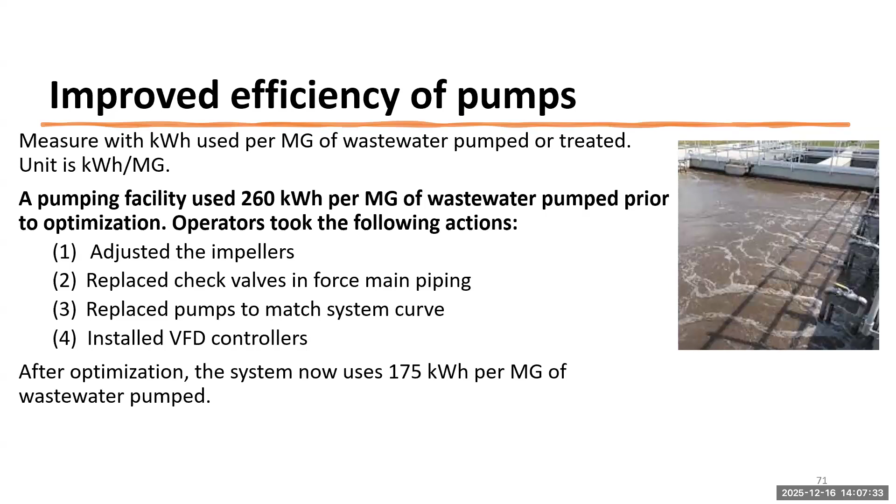So they improved it, and now this pumping system uses less kilowatt hours to pump that same million gallons of wastewater. So if we do that, we could actually look at the efficiency increase: the 260 kilowatt hours it used to take, minus the 175 kilowatt hours we're now using. We look at the difference, divide it by the original 260, and we are 32.7% more efficient now. So we saved that much electricity as well.

If we look at how many kilowatt hours, that 260 minus 175 is 85 kilowatt hours. We can multiply that by the number of hours the pump runs, by the cost per kilowatt hour, and we can actually show a cost savings, how much we actually saved in dollars and cents, and of course that could be used to determine whether we're going to actually save money by doing this project.

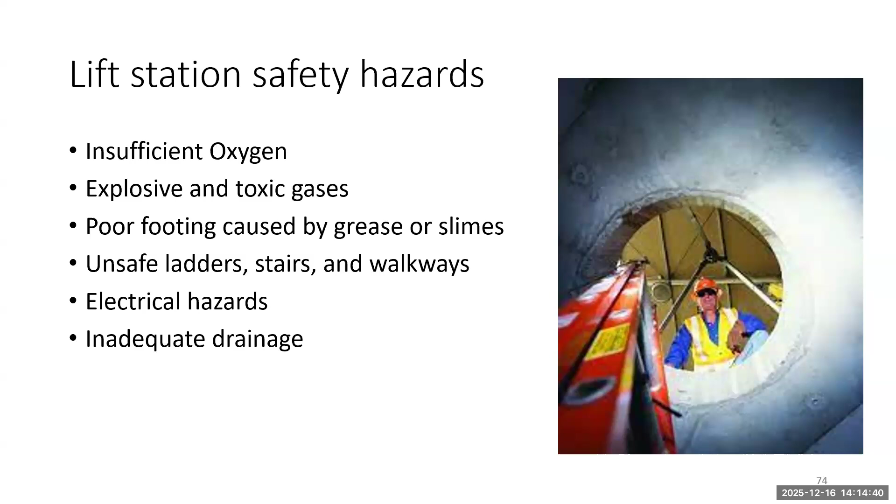In general, after you test the atmosphere for oxygen enrichment or deficiency, you also have to test for toxic or explosive gases such as hydrogen sulfide, and you have to ventilate the space. In general, you're ventilating at a level that changes the air in that volume completely every hour, 12 times per hour.

There's a concept in engineering that relates to safety, and it's called the hierarchy of controls. If there's a hazard, the highest level would be completely eliminating that hazard, and the lowest level would be not doing anything to eliminate the hazard, but just providing workers with personal protective equipment, PPE.

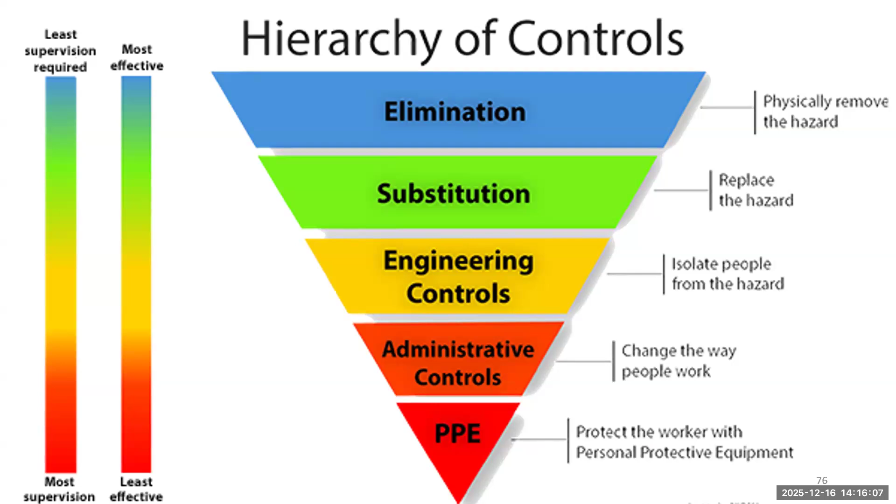So let's say you have a wet well - you don't do anything to make it better, but you have a self-contained breathing apparatus, the safety line, the tripod, and of course everything else in between is modifications to either change the way people work or isolate people from the hazard or so forth. The most effective is elimination of the hazard completely.

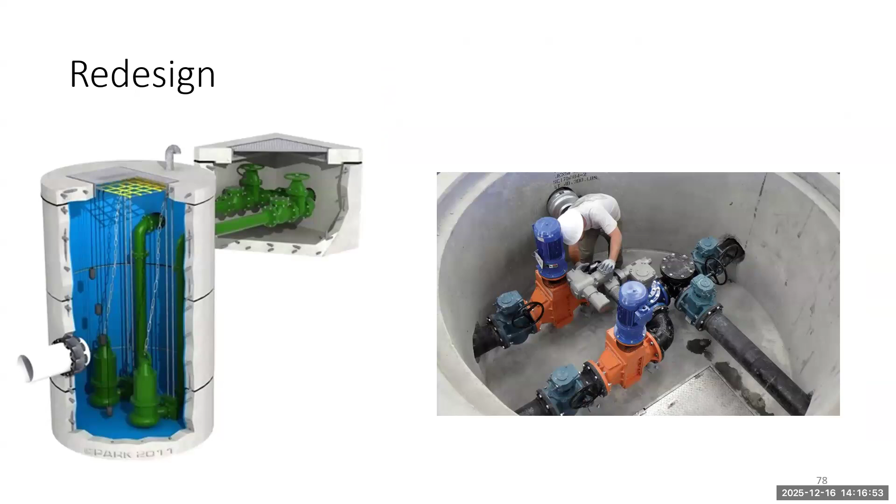If you redesigned, you might redesign that lift station so that the operator can enter into a dry well instead of having to go into a wet well. So that would be an example of redesigning and eliminating or partially eliminating the hazard.

As I mentioned before, lifting the pumps of a submersible pump out of a wet well, it just slides up a couple of rails, and you notice that lifting chain is stainless steel, so it won't corrode and will remain in good shape. But this is also a safety mechanism, so you don't have to enter the wet well.

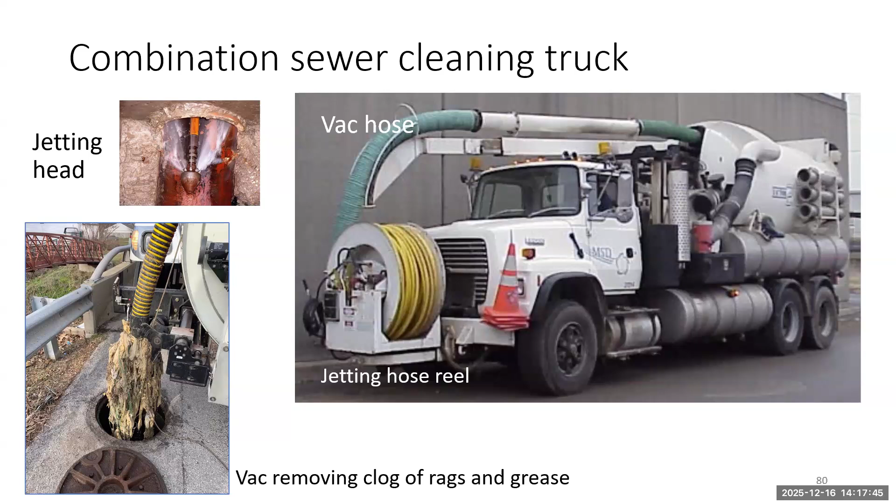Ways of maintaining the sewer include running a combination sewer cleaning truck. You see there's a jetting head on the upper left and a vac on the lower left, used to pull materials to a manhole with the jetting head and then remove them with the vac. In general, when you clean a sewer, you start at an upstream manhole with the jetting head, which has a high pressure spray backwards, and you pull that debris back to the manhole and use the vac to pull it out. If there's roots, you can add attachments that will cut roots onto that jetting machine.

There's a variety of maintenance strategies. We have preventative maintenance, which is based on time or amount of use, where you do it every so many gallons or so many days. There's predictive, where you maintain on the basis of inspection. That would be something like you have an ultrasound, and it shows the bearing is possibly going to fail within the next year, so we make plans to replace that bearing. And then run to failure is also a valid strategy because there's certain components, like a relay - it's like a little black box, and there's nothing you can do to maintain it.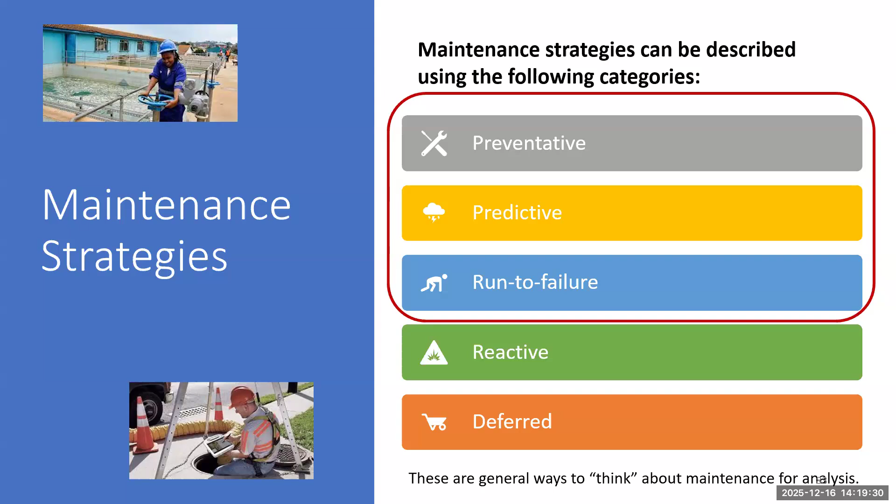Reactive and deferred maintenance shows that there's something going on. Reactive would mean that our infrastructure is aging and we have some problems and things are breaking down. Deferred means we have some problems with capacity in our utility - we have financial problems, managerial problems, or technical problems. We don't know how to do it, the management doesn't see the importance of it, or we don't have enough money to do it.

We can do a measurement called the planned maintenance ratio to see how much of our maintenance time is planned and how much is reactive. The planned maintenance ratio is the hours of planned maintenance divided by the total hours of maintenance we conduct, and we'd like that to be as high as possible. If it's lower, it means we have some reactive maintenance going on, unexpected breakdowns that have been occurring.

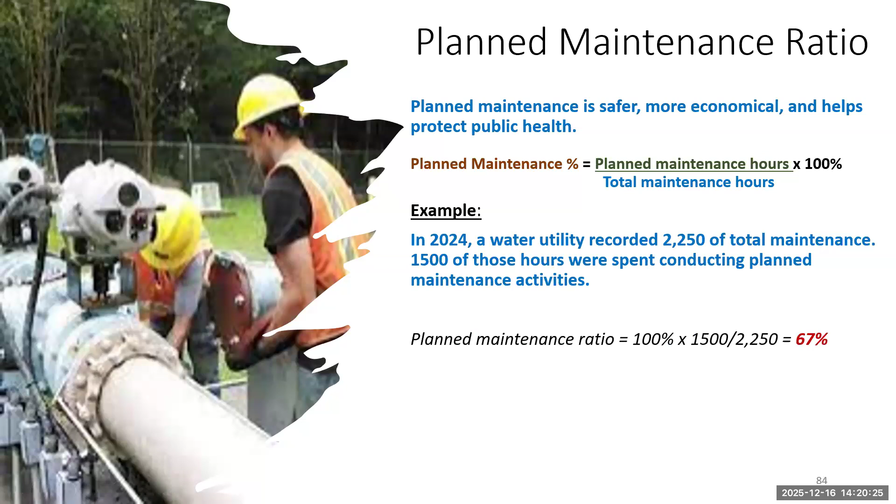Here's an example of how we might use that. We had a utility that had 2,250 hours of total maintenance, and 1,500 of those hours were planned. So we can do the ratio by taking those 1,500 planned divided by the total of 2,250, and we see that we had a planned maintenance ratio of 67%, which is not bad. Over time, as you improve your infrastructure and your inspection techniques, you would expect that to go up, because you're planning instead of reacting.

Now I'm going to give you a chance to calculate this yourself in the next poll. We're asking: we have a utility that has 1,000 hours of planned maintenance, but the utility also spent 800 hours fixing unexpected breakdowns. So we have to first figure out the total maintenance: 1,000 hours of planned plus 800 hours of reactive gives us a total of 1,800 hours. Then we take the 1,000 hours of planned and divide it by the total: 1,000 divided by 1,800 gives us 55.6%. Over time, we'd like to reduce the amount we spend on reactive maintenance.

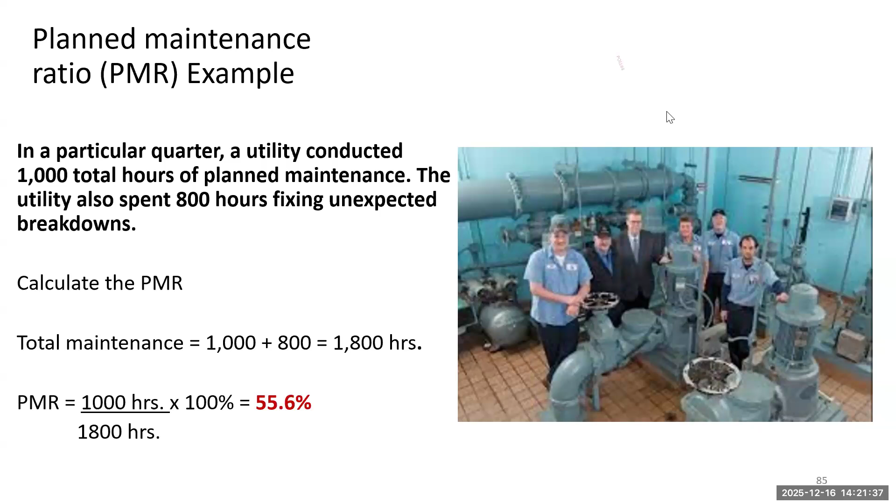Let's try poll 4 now. What percentage of the maintenance time at your utility is reactive? You can do a quick calculation in your head, or you can just estimate.

All right, we're at about 71% here. I'll give a 10-second warning because we're going to wrap things up pretty soon, we're almost at time. I'm going to end the poll. The majority of you, 40%, said between 26 and 50% is reactive - you're spending a significant amount of time on reactive maintenance. Some of you said less than 10%, that's great, and some said greater than 50% of your time is reactive - that's kind of like fix it when it breaks. And between 11 and 25%, 28%.

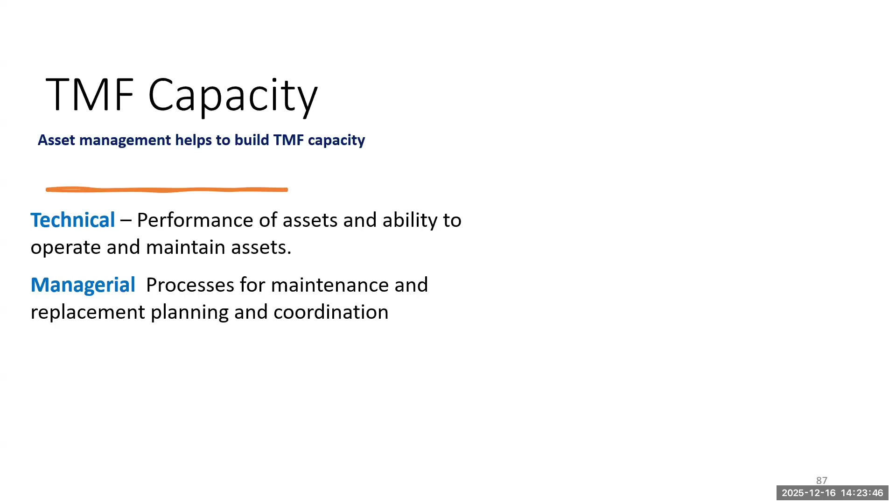So that's a transformation over time that will improve as you build capacity. Capacity can be described as three legs of a stool, kind of. You have technical - that's the performance of your assets and internal knowledge to operate and maintain. The managerial capacity is planning and coordination - that's what you're learning about now, since asset management is a managerial process. And financial - do you have enough revenue to cover all these things? This is an EPA concept, TMF capacity.

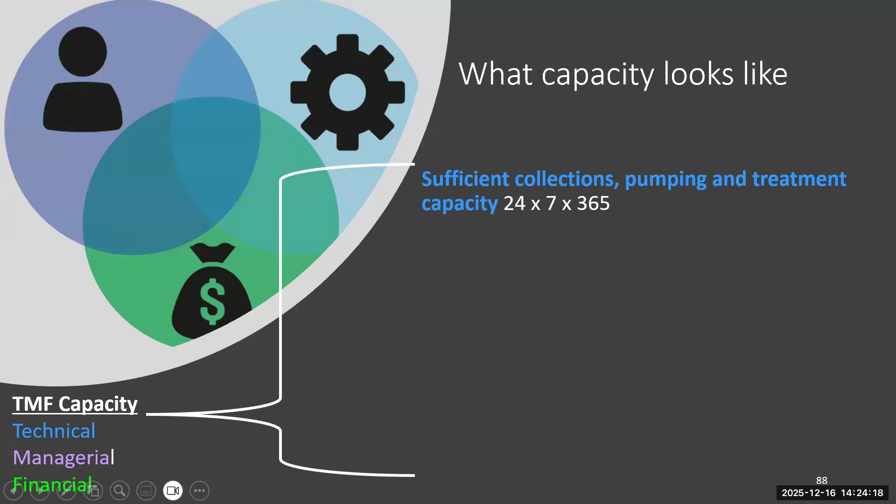Do we have sufficient pumping, treatment, and collections capacity that operates continuously? Do we have redundancy and backups? Do we have a sufficient trained workforce? That's managerial - adequate policies and standards. And the financial side - do we have adequate revenue to fund operation and maintenance and to cover debts? Do we have a capital improvement plan with reserve funding? So that's how it actually manifests in the things that are important to us.

There's a couple ways we can use to assess our financial capacity. One is the operating ratio - it's the ratio between the revenue we receive through rates divided by the operating expenses. Obviously that needs to be greater than one, or at least one. If it's less than one, we don't have enough money to even cover our basic operating expenses. If it's equal to one, we just have just enough, but we want it to be greater than one - it means we can cover our operating expenses plus some capital investment. Typically, funding agencies will want to see an operating ratio of at least 1.2, but if you can get it a little higher, it means you have some extra funding for reserves.

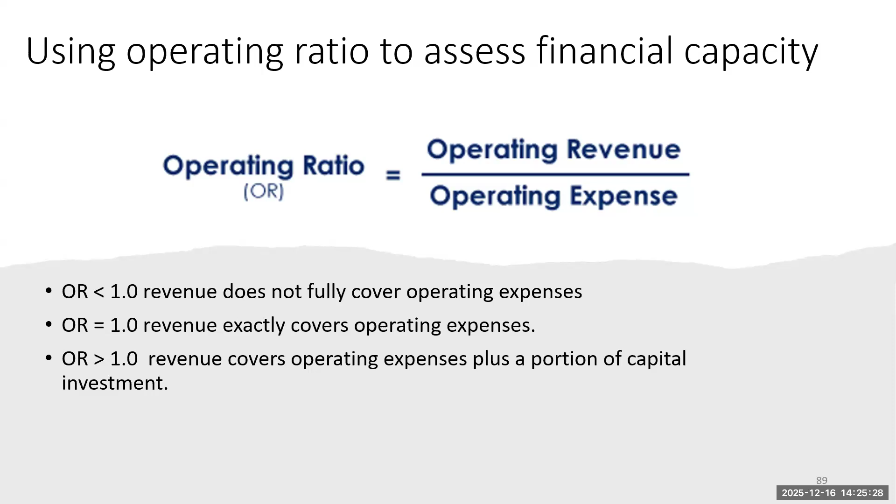The debt service ratio is also a good ratio to look at. It gives you your capacity to cover your debt payments. You're taking the net revenue - net revenue is the income minus the expense - and you divide that by the annual principal and interest. You'd like that to also be at least one, but a debt service ratio of 1.2 or greater is even better.

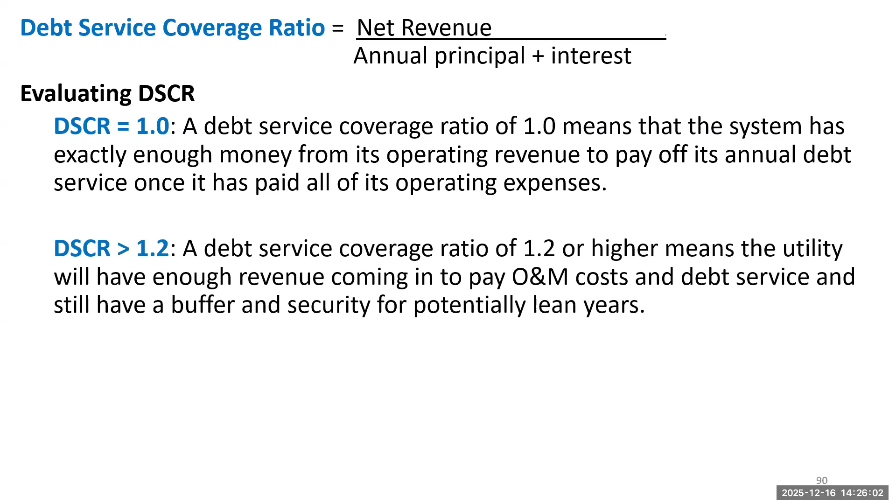When we actually bring the annual cost of the CIP plan to our budget, we would do something similar: what's it going to cost to replace it, divided by the years remaining. So for example, we have a VFD that we're going to install to run our pumps. That's going to cost 25,000. We're going to do it in 8 years, so we take the 25,000 divided by 8, and so we're going to want to contribute $3,125 per year for that project, and that's going to go into our budget.

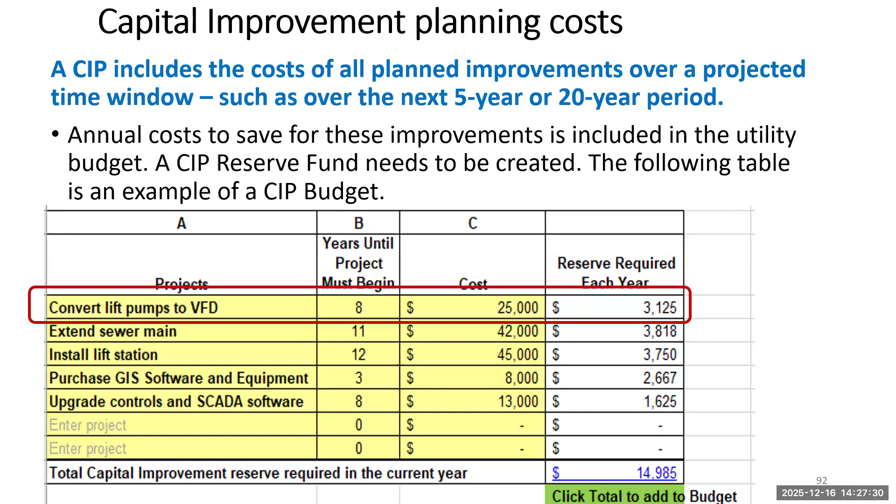If we were going to analyze how well we're doing in a utility, it would be a good idea to calculate both the operating ratio and the debt service ratio. Here's an example: our annual operation cost is 250,000, our income is 325,000, our debt principal is 60,000 plus interest, giving us a total debt service payment of 62,500. We can calculate the operating ratio by taking the income divided by the operating cost, which gives us 1.3. But for the debt service ratio, we calculate the net income - that's 325,000, our income, minus our expense of 250,000, gives us 75,000 of net income. Then we calculate the debt service ratio: 75,000 income divided by our total debt payment, 62,500, and we see our ratio is 1.2.

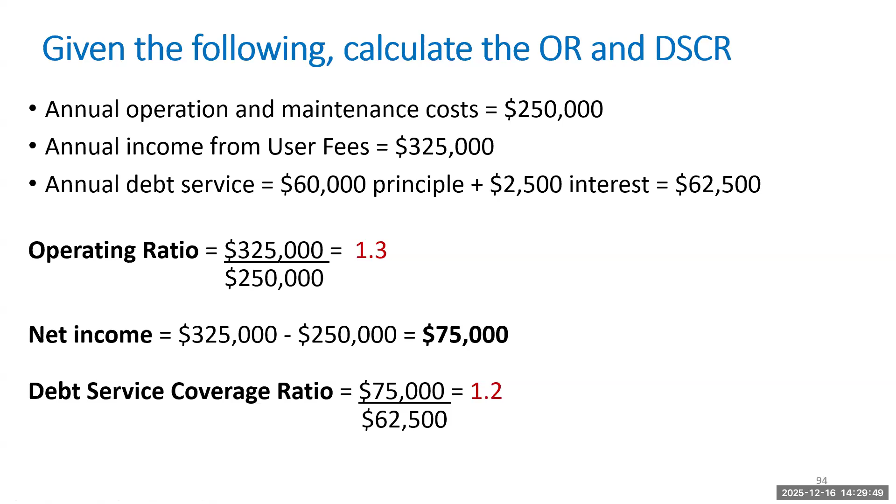So that utility is doing just right. But as prices go up, rates have to go up too.

You can also look at your audit reports. In the audit reports, you'll have a balance sheet. It shows you if your overall equity is increasing or decreasing over time. The statement of cash flows will show you where your cash is going and coming in from. And your income statement gives you your profit or loss. That net income is important to know. So those sheets can give you the information that you need.

And we have our final poll of today. We have a utility that has expenses of 250,500 and revenue of 325,600. We want to ask, what's the operating ratio? Our time is expired, but I'm going to hang around for another few minutes for questions. I'm a little slow today, sorry.

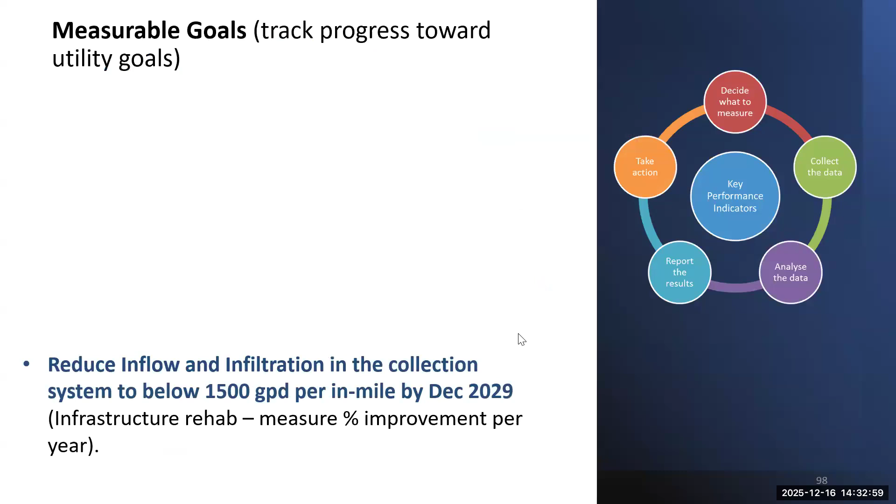And we're going to skip these last couple slides. You can look at that on your own. It's just a quick example of strategic planning, how you could bring the major projects that you have into a strategic plan, and an idea that we can change the culture of our system by having proactive planning that results in an asset management plan and ways to improve our utility.